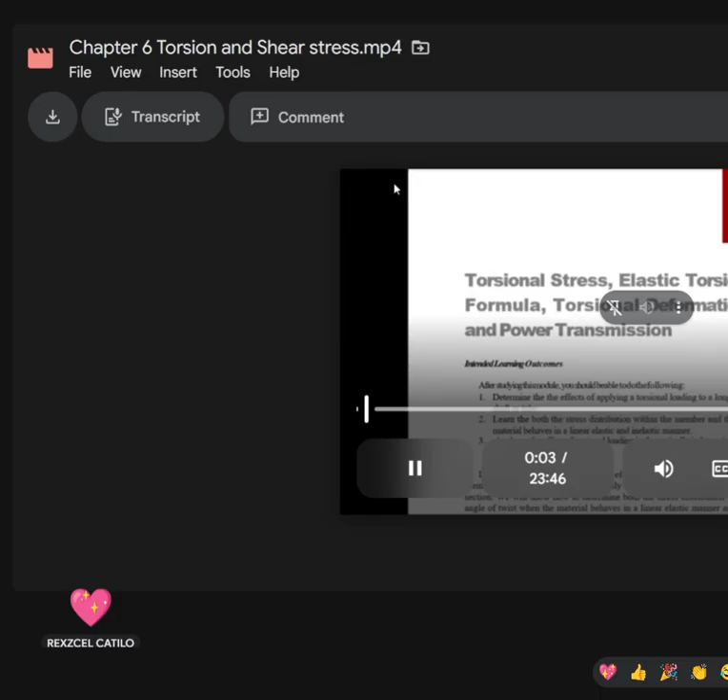So now we will proceed to our new chapter or module. We are now at module 6, titled Torsional Stress, Elastic Torsion Formula, Torsional Deformation, and Power Transmission. So from the word torsional stress, ano po ba yung stress na meron when our object or body is experiencing a torque? We also have the elastic torsion formula - what is the formula to determine the elastic torsion? Another one is torsion deformation, and also the power transmission. So for our module 6, we have 3 learning objectives.

So after this chapter, students should be able to do the following: first, determine the effects of applying a torsional loading to a long straight member such as a shaft or tube. Second, learn both the stress distribution within the member and the angle of twist when the material behaves in a linear elastic and inelastic manner. And last, third, analyze the effect of torsional loading in statically indeterminate shafts and tubes.

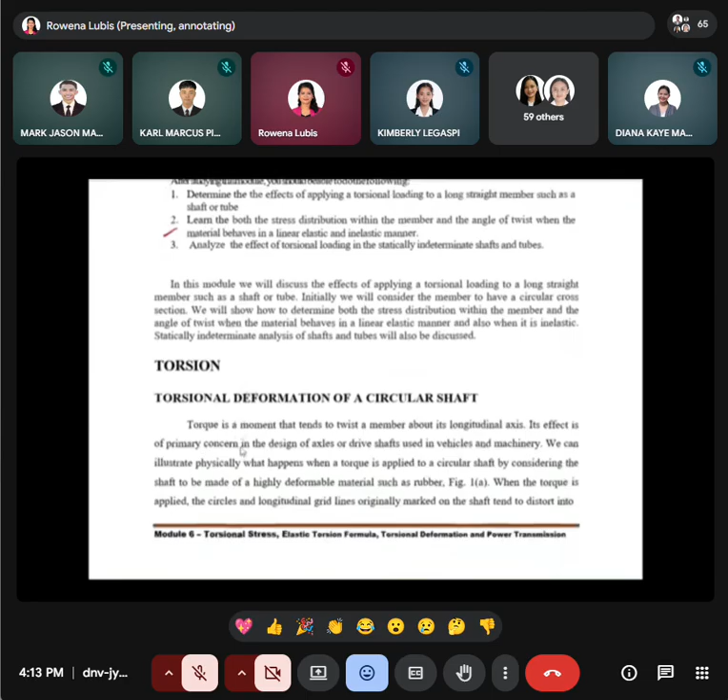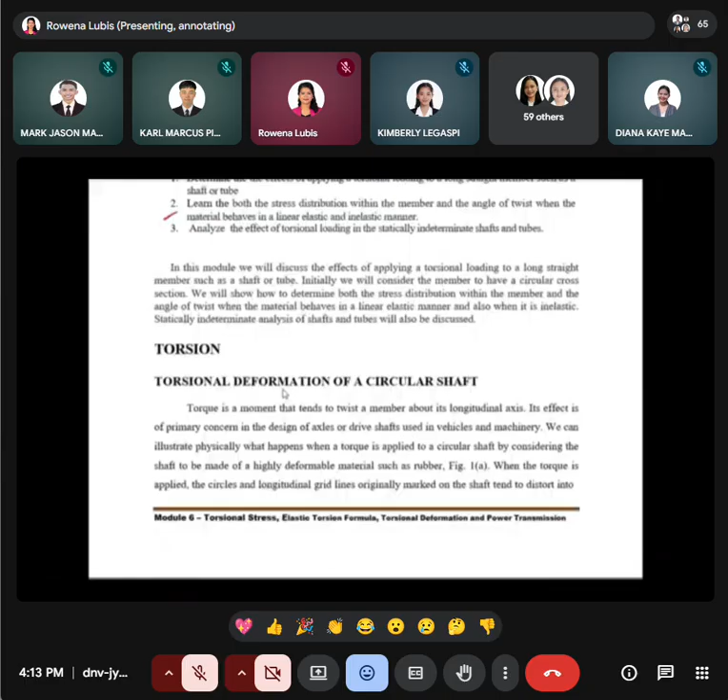Okay, so let's proceed with the torsion - torsional deformation of a circular shaft. We will discuss here the torsional stress and deformation which occur when a member, such as a shaft, is subjected to a torque or twisting. So look at the illustration - illustration A and illustration B at figure 1. You can see we have here part of the shaft. Once it is experiencing the torque, look at what happened to its longitudinal axis, what happened to the circular part, and what happened to its cross section.

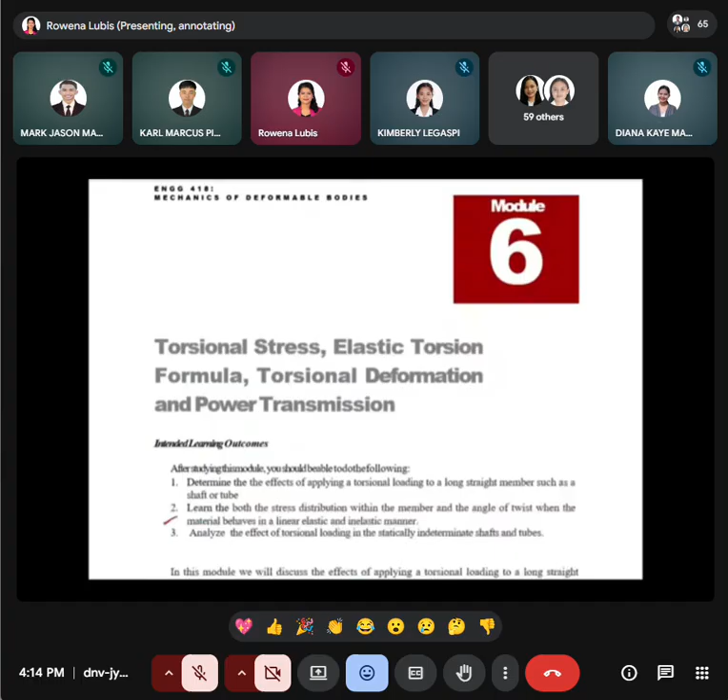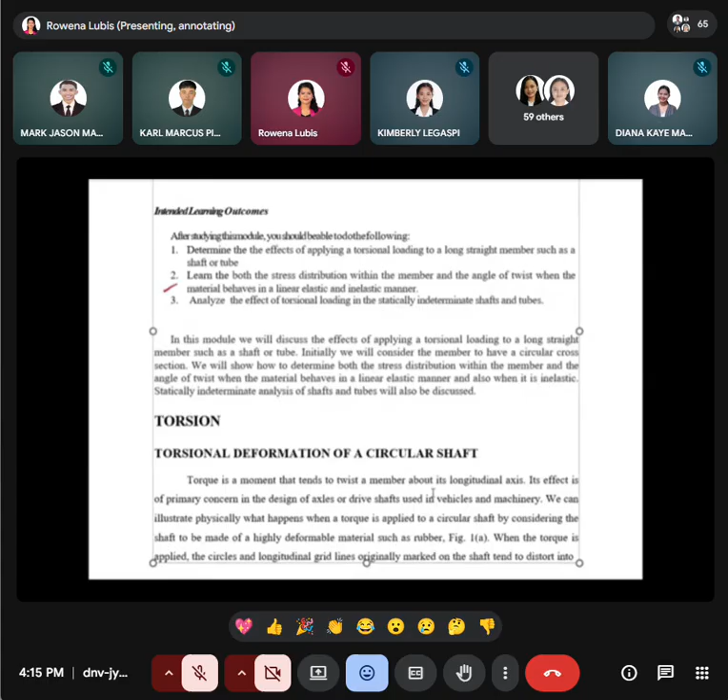So let's define first what is torsion or what is torque. As mentioned in our module or from previous study, we know that torque is a moment that causes a member to rotate about its longitudinal axis. This is very common in engineering applications, especially in drive shafts, turbines, and rotating machinery. We know that when a circular shaft is subjected to a torque, several things happen. As presented here at figure B, the shaft twists along its length.

Twisting causes the circles to remain circles in its circular cross section - the cross sections remain circular, but they rotate relative to each other. And the shear stress develops, and that shear stress developed varies along the radius of the shaft - meaning from the center, the shear stress develops going to the surface of the cross section of the shaft. So the key idea is the shear stress at the center is zero, and it increases linearly outward, reaching its maximum value at the outer surface.

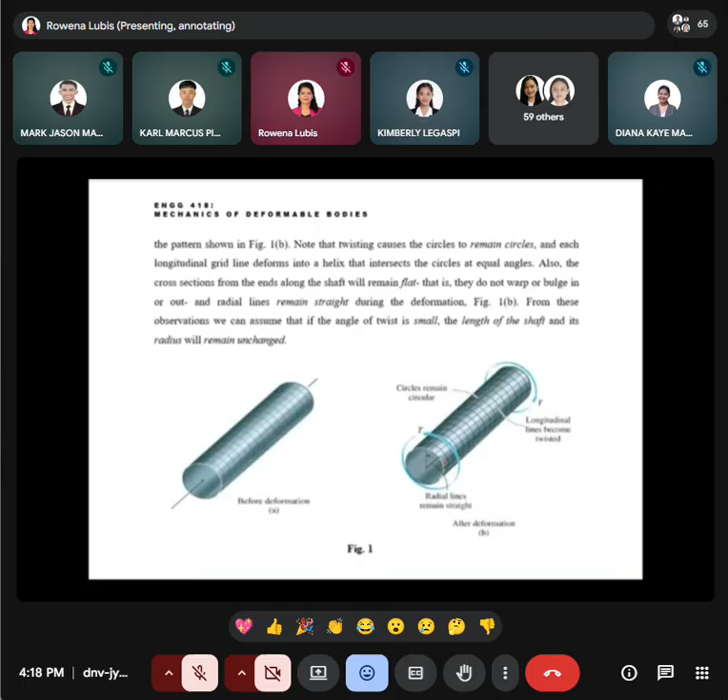The deformation is within acceptable limits, because those are very important for safe and efficient power transmission in design.

Let's proceed now with the torsion formula, because in this chapter, what you must do is to memorize or familiarize yourself with the formula. Pagkuha ng torsion, the shear stress, the polar moment of inertia, we do not have to derive, but I expect that every one of you understand the derivation of the formula. In solving torsion related problems, you just have to know or have memorized already the formula related to the torsion problem. So in this torsion formula...

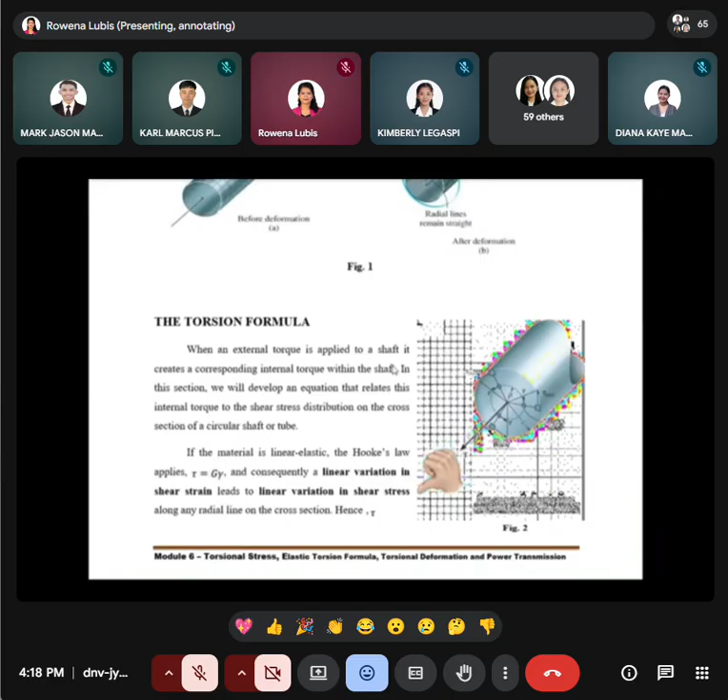Let's examine what happens to a circular shaft when torque is applied. As I mentioned, ito po yung ating original before the deformation. But after the application of torque, look at how the deformation happened in this circular shaft. It is being twisted in a certain angle. Its cross section or circular remains circular, but the longitudinal lines become twisted.

And how do we connect that to the torsional formula? So when an external torque is applied, it produces an internal resisting torque within the shaft. And what is that internal resistance? That is the internal torque. And because of that internal torque, it develops a shear stress. Shear stress distribution goes from the center to the surface of the cross section. The internal torque is related to the shear stress distribution over the cross section. As I mentioned, shear strain varies linearly from center to the outer surface.

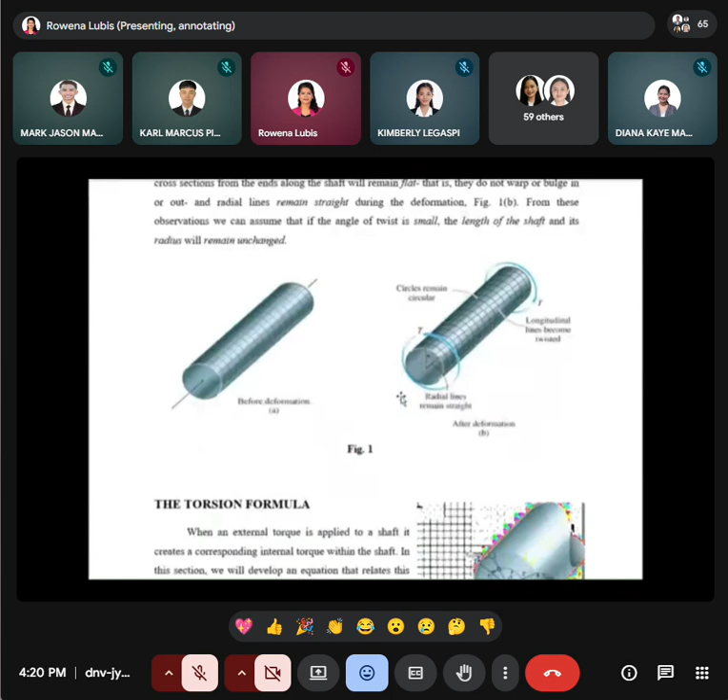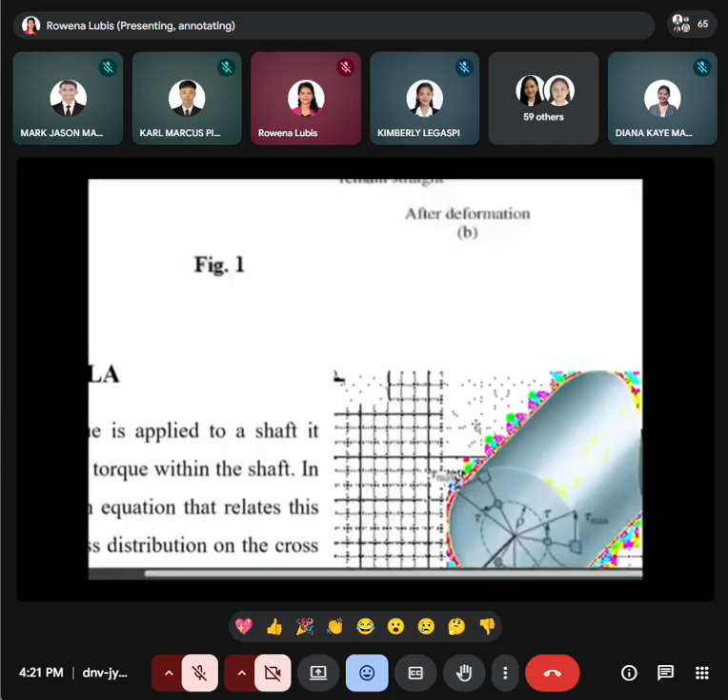Let's proceed to the next one. Actually this page presents the illustration. So as you can see, the relationship po, the cross-sectional area of the shaft, we can see the illustration of what we call this, somehow looks like raw, but it's actually not raw. It is a distance, or this is the location. So if we have the center, our rho at the center is equal to zero.

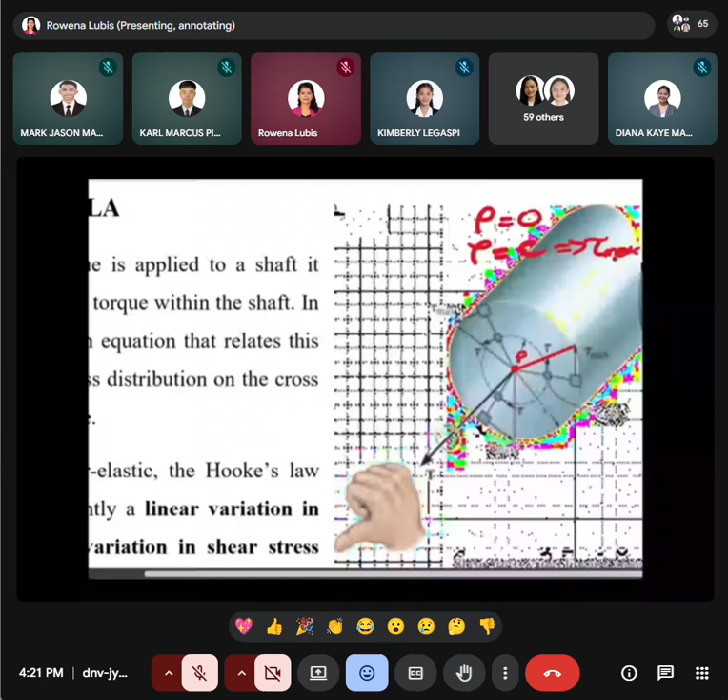Meaning shear stress is zero at the center. And at the outer surface, this distance, the surface of the shaft, our rho here, is the farthest point. This is the location of the maximum value of the shear, the tau max. This relationship is explained here on the next page of our module.

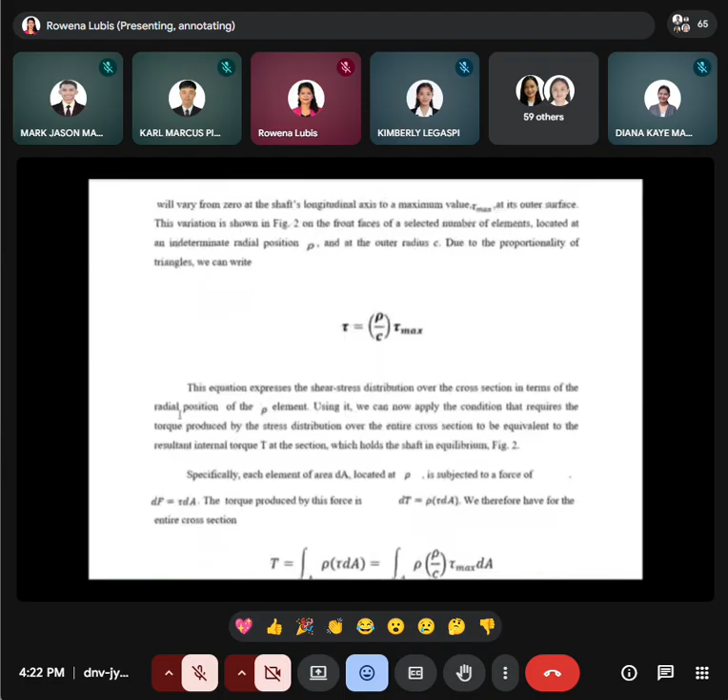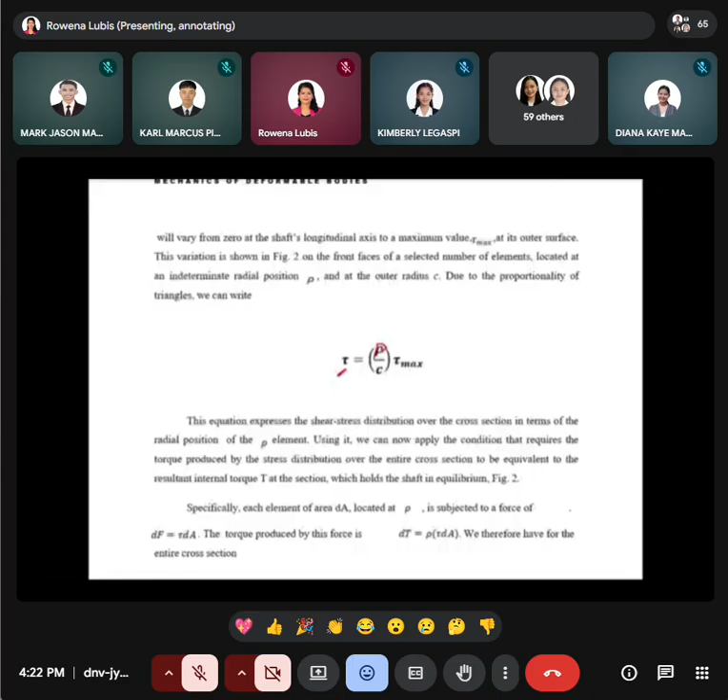The next page shows this relation, that our shear stress developed due to torque is equal to the certain point of the cross section of the shaft over the radius of the shaft, or the C, multiplied to the shear maximum or the maximum shear. So this equation tells us that the shear stress at any point depends on its radial position.

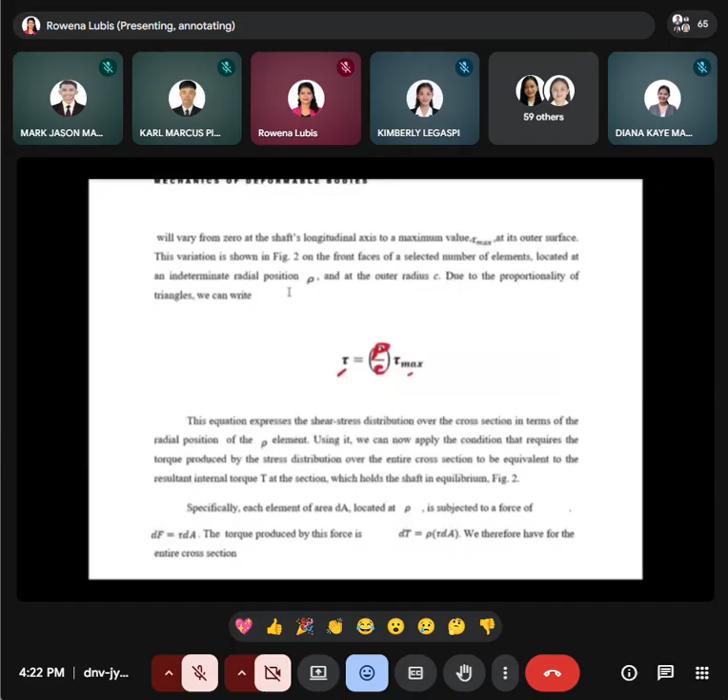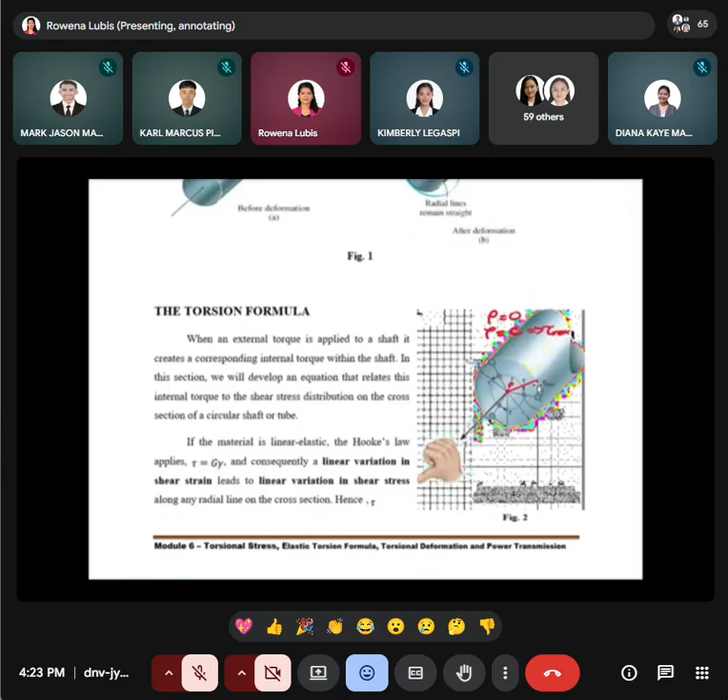And now to relate this to the applied torque, we consider again a small area element. Going back to the figure, we consider a small part of the element dA, a differential area, located at a distance, yung rho ng consideration. We have there yung ating dF is equal to tau dA. The small torque produced, of course, is dT.

Rho, or the distance at a point, multiplied to the tau dA. And to get the total torque, we just integrate: the integral of distance at any point rho multiplied to tau dA, in the limit of the area.

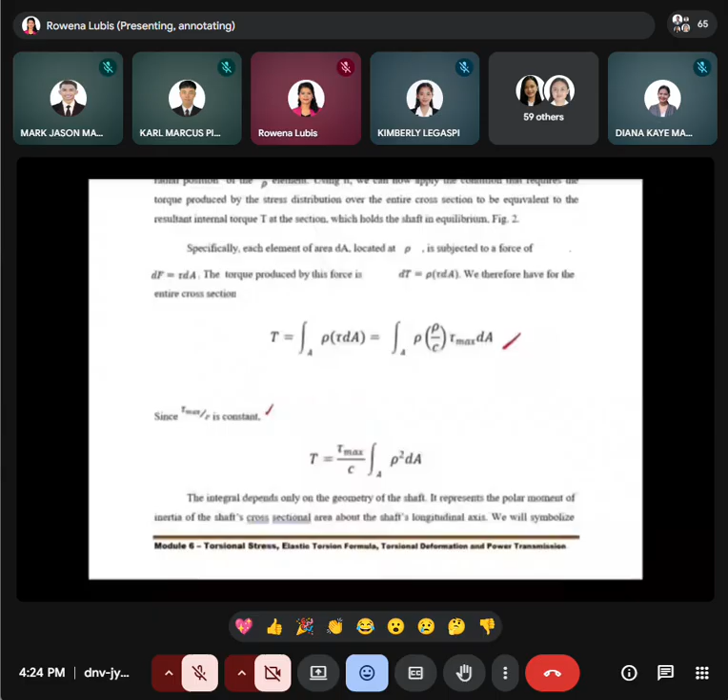Substituting the equation, it is well presented in our module. We will be having this equation. So our tau, sorry, the torque, tau, since our tau max over C is constant, we can simplify the equation. Labas natin siya sa integral equation: tau max over C, constant, times the integral of the distance squared, dA, limit of area. And with that term, we can simplify the term into this term.

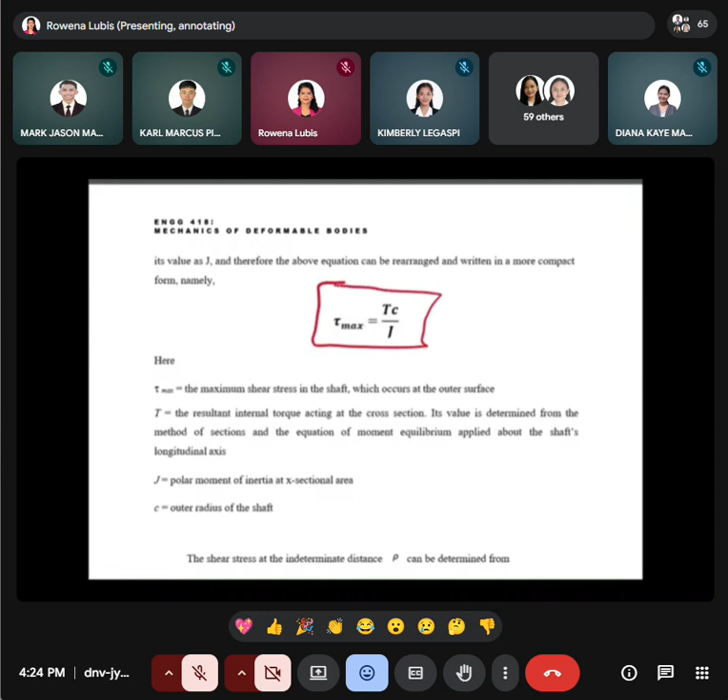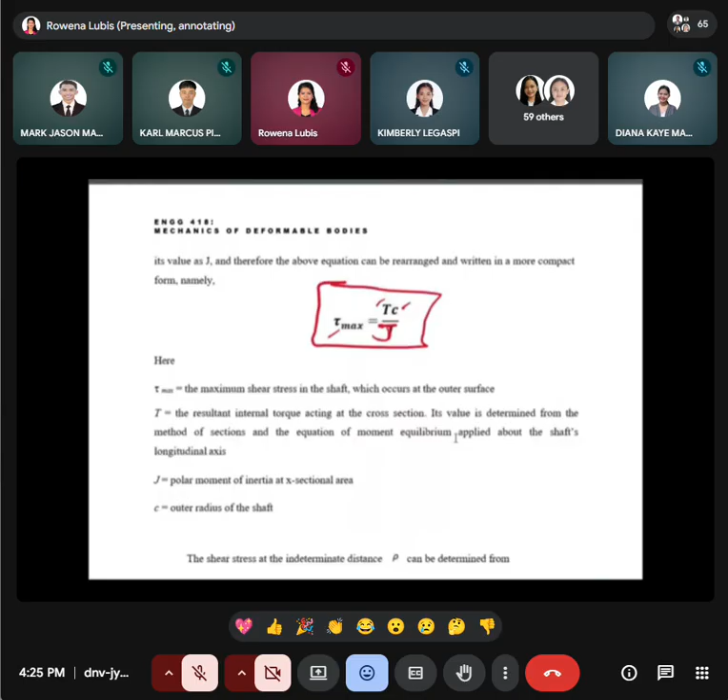That our maximum shear is equal to T multiplied to C over J. This is the maximum shear, the torque, the outer radius of the shaft, and the polar moment of inertia. So this is the formula for the maximum shear stress. Remember that the further a material point is from the center, the higher the shear stress it carries. This is why the outer surface is the most critical region in torsion design, because that is where the shear stress is maximum.

Now let's proceed with the next one. Still, after the formula for the maximum shear stress, let's go to the illustration.

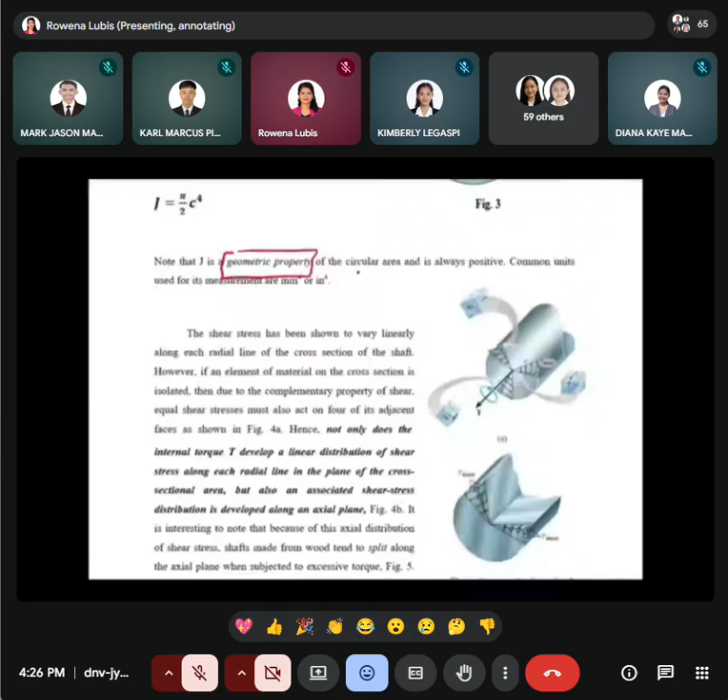J, or the polar moment of inertia, is a geometric property of the circular area. Remember that it is always positive. So our formula for the solid shape is pi over 2 times c raised to the 4. This is taken from this integral equation and simplification. What you have to do is just remember this formula.

As we mentioned, our maximum shear stress is equal to TC over J. So in a torsion-related problem, we get the value of the torque and then we find the value of the polar moment of inertia. This polar moment of inertia will be computed through this formula. Again, this is for the solid shape.

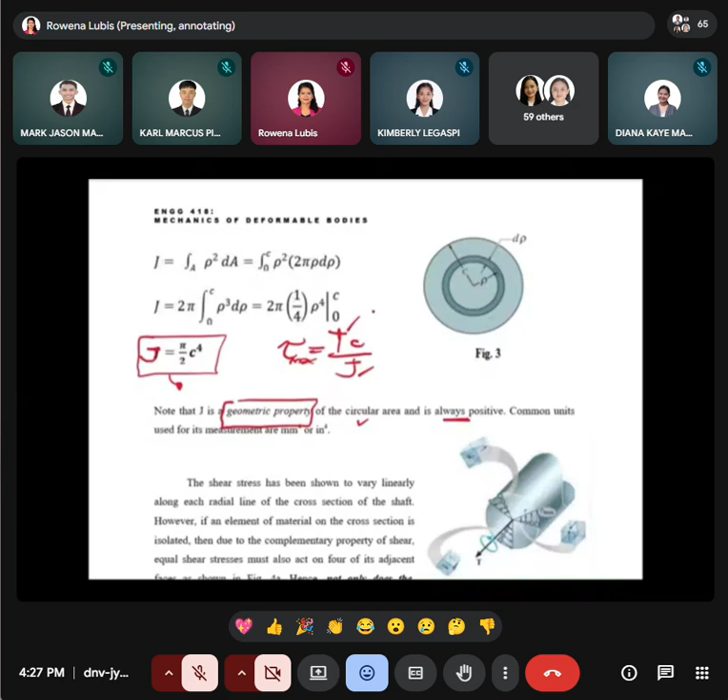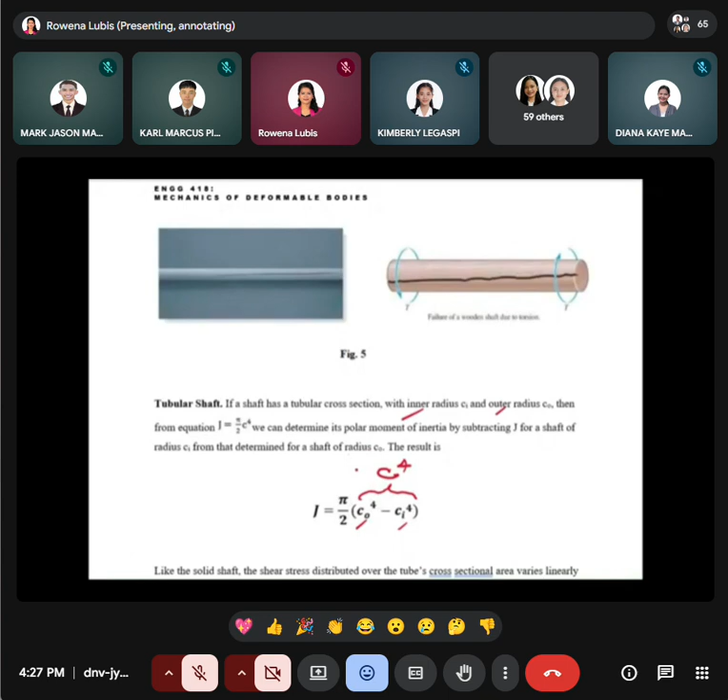Considering that we have a solid shape, if we have the hollow shape instead, given on the next page, when we're dealing with a tubular hollow shape, meaning we have the outer and the inner radius, the formula for a solid shape is just C raised to the 4. But in case of a hollow shape, it's outside radius raised to the 4 minus inside radius raised to the 4. So remember the formula, because we will need it to find the value of the maximum shear stress. We need the value of the polar moment of inertia.

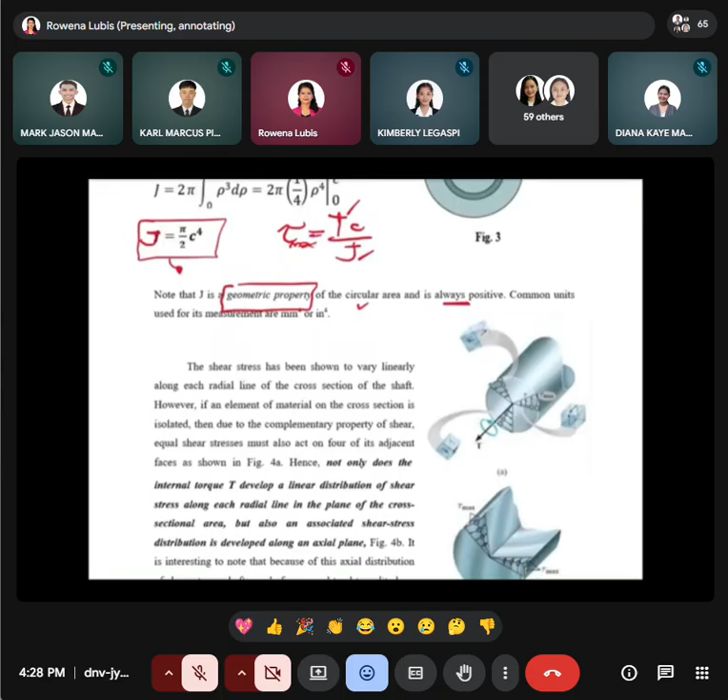And here for the absolute maximum torsional stress, as I mentioned, it is at the surface or outer radius of our shaft. To determine the maximum stress in a shaft, we use the relation of torque, the C or the radius, divided by the J. So that's what I was saying.

Just remember that hollow shafts are widely used in the engineering field because they provide high strength with less material. Understanding where the maximum torsional stress occurs ensures safe and efficient design. So that's all you need to remember.

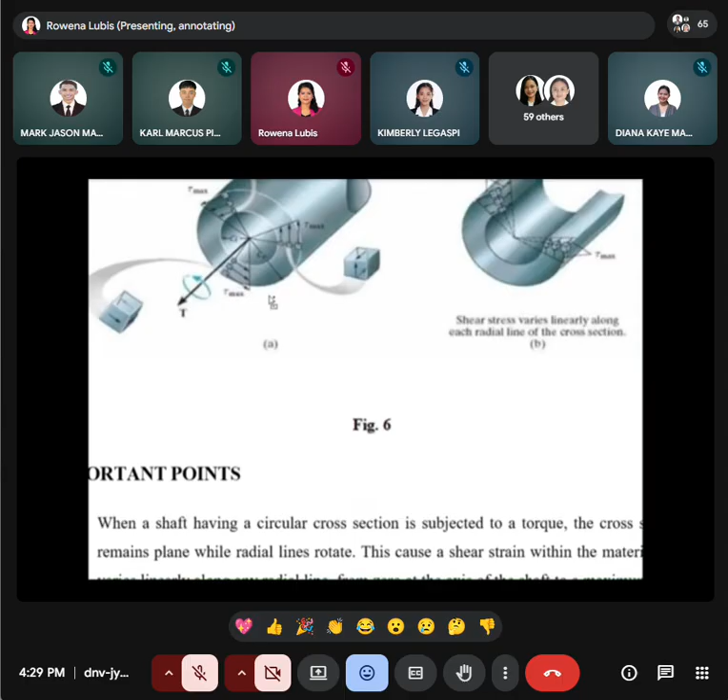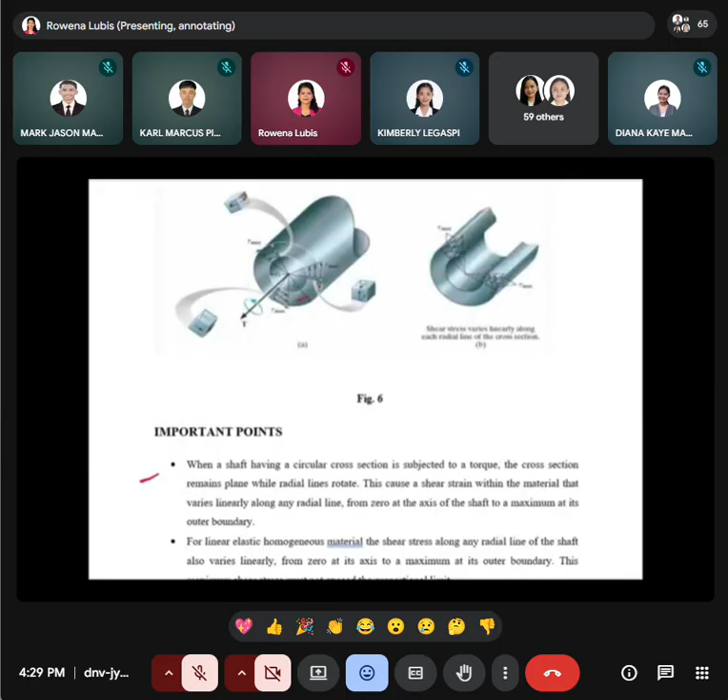Let's proceed with the important points. This illustrates how it happens. For the important points, let's take it one by one. First, when a shaft is subjected to torque, the cross-sectional area or the cross-section remains the same plane, and it rotates as a rigid body. This means there is no warping and the shape stays circular.

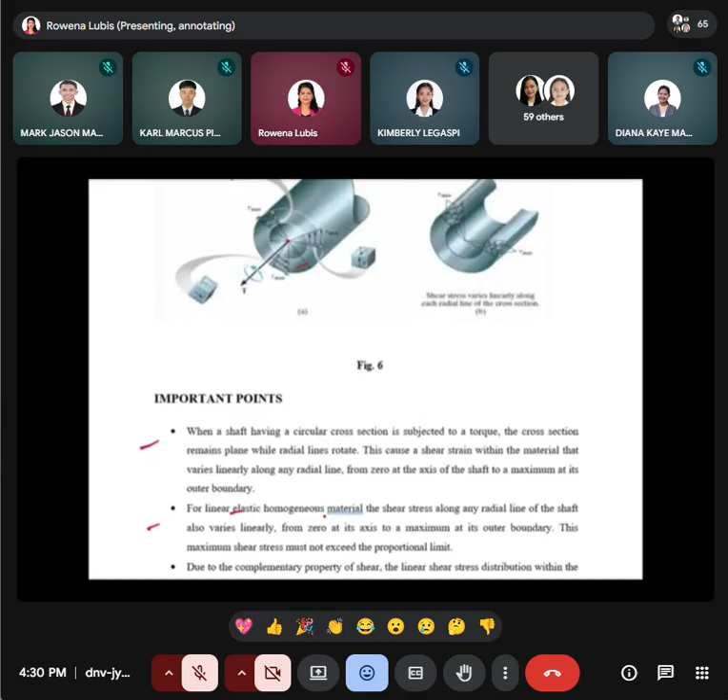Second, the shear stress varies linearly along the radius. As I mentioned, from zero at the center, it goes to the maximum at the outer surface. This linear variation is a direct result of the material behaving in a linear elastic manner, following Hooke's law.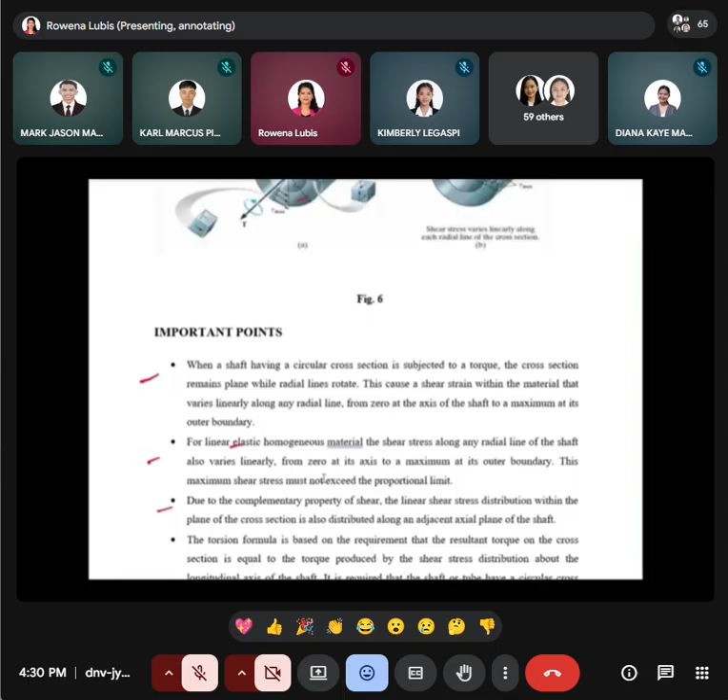Another important concept is the complementary nature of shear stress. Because of this, shear stress is not only present on the cross-sectional plane, it is also present along an axial plane of the shaft. This explains why torsional failure may occur along the length of the shaft, not just merely in its cross section, especially in materials that are weaker in that direction.

Finally, for the important points, the torsion formula is based on equilibrium. We still use the equilibrium equation. From the word torsion, what is torsion? When we deal with the equations of equilibrium, it's just a moment, which has a unit of force multiplied by distance, could be Newton-meter, pound-inch, or pound-foot. So it's just the same unit as moment. The internal resisting torque must be equal to the applied torque when we apply the equations of equilibrium.

This comes from the distribution of shear stress over the cross section. But remember, the formulas we are dealing with in torsion are just for a circular cross section. They are not applicable to rectangular cross sections; these formulas are applied only to circular cross sections.

Another assumption to consider: the material is homogeneous and behaves linearly elastic. These are important points to remember. In torsion, both geometry and material behavior control how stress is distributed. So that's what you should remember.

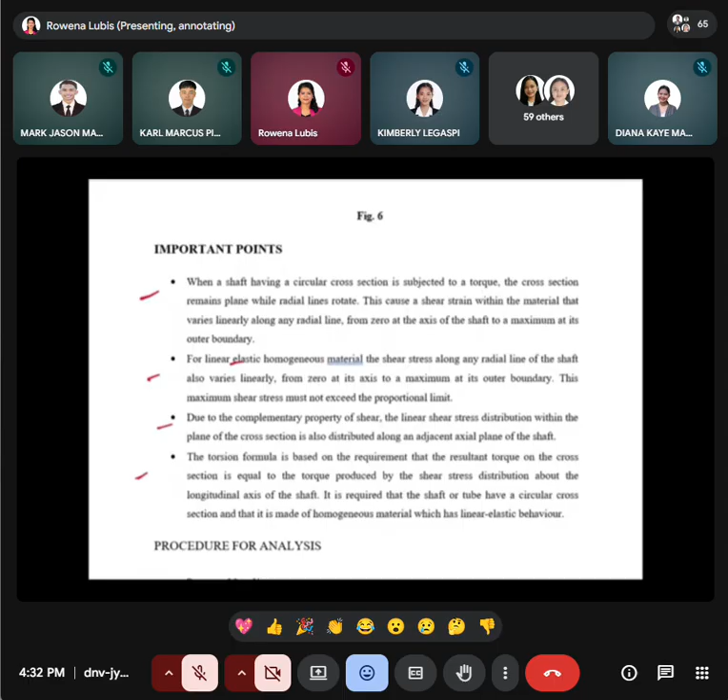The procedure for analysis: first, for the internal loading, this is how we get the value of torque. First, we should make a free body diagram. Determine the internal torque by sectioning the shaft perpendicular to its axis at the point where shear stress is to be determined. It's up to you how you find it, but I hope you already know how to establish your free body diagram.

Same as with moment, you will make a torque equation, satisfying the conditions of equilibrium. After you find the value of torque...

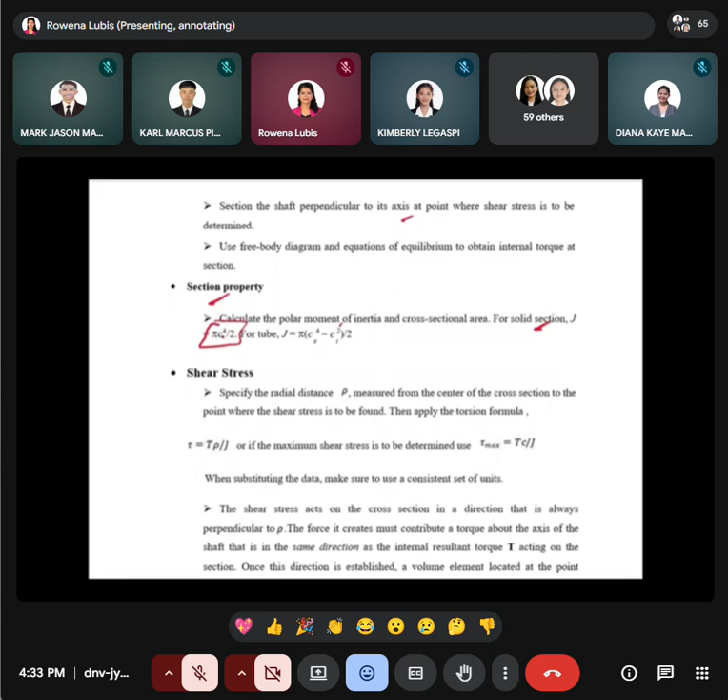Calculate from your section property the value of the polar moment of inertia and the cross-sectional area. For a solid section, we have the formula pi over 2 times c raised to the 4th, where c is the radius. For a tube or hollow shaft, we have pi over 2 times the outside radius raised to the 4th minus the inside radius raised to the 4th.

Once we know the value of J and the value of torque, we can proceed to determine the value of shear stress. What you have to do is determine where you want to evaluate the stress, by measuring rho, the radial distance from the center. Applying the formula, shear stress equals T multiplied by rho, the radial distance from the center, over the polar moment of inertia.

If you are solving for the maximum shear stress, tau max, you just use the formula equal to torque times C, the outside radius, over the polar moment of inertia. This is the formula.

For the important note, remember to always use a consistent set of units. Shear stress acts perpendicular to the radial distance, so the direction of shear must produce the same sense of rotation as the applied torque.

Everyone, now let's proceed with power transmission, still in shafts. Let's discuss how the formula is used for power transmissions. In engineering systems, shafts and tubes are often or commonly used to transmit power from one component to another, such as from a turbine to a generator or from an engine to wheels.

In the concept of power rotation, we already know the definition of power: power is defined as the work performed per unit of time. We knew from our previous courses that power is just the rate of doing work. For a rotating shaft, work is done when a torque causes rotation. If the shaft rotates by a small angle theta...

...the work done is dw equals T d theta. And what happens to power? Power becomes T d theta over dt.

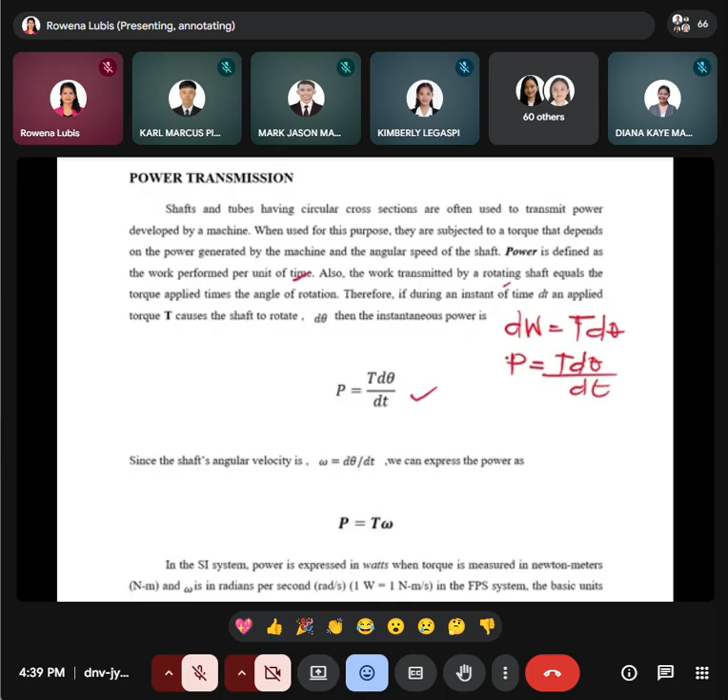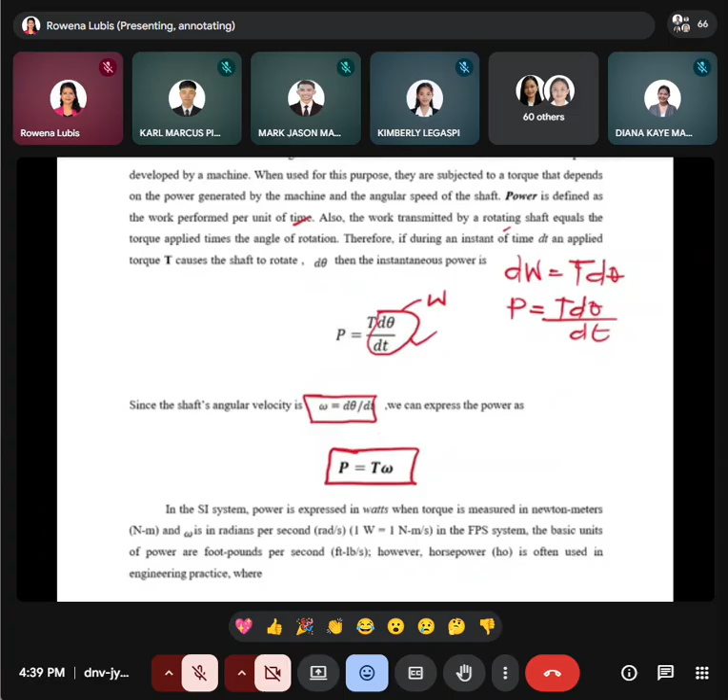And the power torque relationship, remember, we have the angular velocity of the shaft represented by omega, d theta over dt. So this is our angular velocity. Our power now, substitute the value here with the angular velocity. Therefore, our power is equal to torque multiplied to the angular velocity. That is the simplified equation.

So remember the formula for the power. Here it's just showing the units of power. In SI unit, we have watts. For the unit of torque, Newton meter. For the unit of angular velocity, we have radian per second. And remember that 1 watt is equal to 1 Newton meter per second.

And in FPS system or the foot pound system or foot pound second system, abbreviation lang po. So the basic units of power are foot pound per second. But of course, mas ginagamit din natin ang HP or the horsepower, is often used in engineering practice. And the conversion, 1 horsepower is equal to 550 foot pound per second.

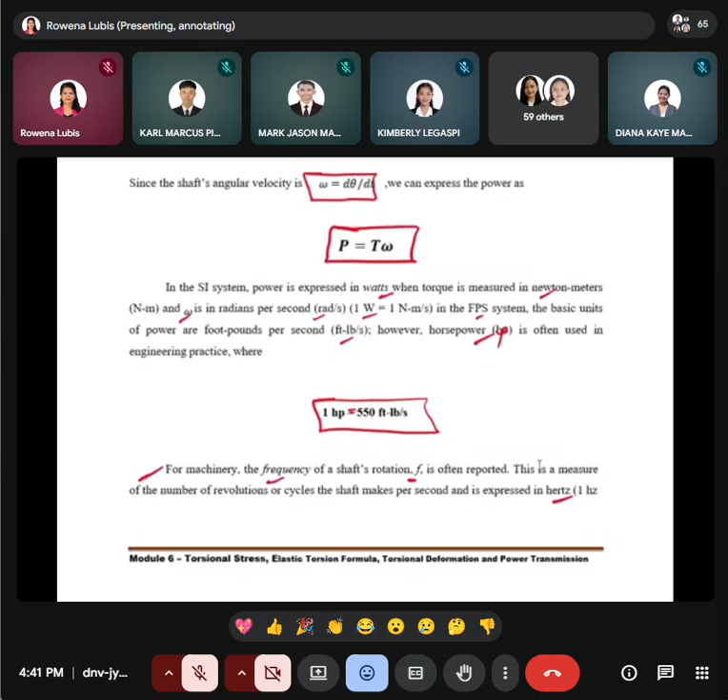And another thing that we should be reminded is the frequency of rotation. So in practice, we also use frequency or F. So it represents the number of rotations per second. So it is being measured or expressed in hertz. So the relation to angular velocity. What is the relationship? This is the relationship of the frequency and angular velocity.

We have the formula angular velocity is equal to 2 pi multiplied to f or frequency. Since one cycle is equal to 2 pi rad, then angular velocity is equal to 2 pi f. Therefore, if this is angular velocity, di po ba kanina power is equal to torque multiplied to the angular velocity, and this is now 2 pi f. So substitute to the formula, it will give us another formula for power in terms of torque and frequency. P is equal to 2 pi f T. So you just have to remember the formula.

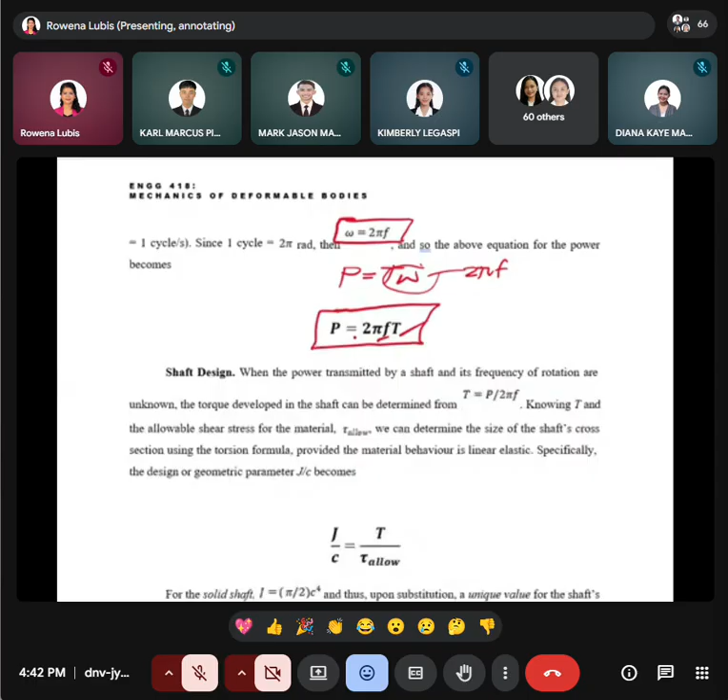So this relationship shows that power can be increased by torque and F, by the rotational speed. This is why high-speed turbines can generate a large amount of power even with moderate torque. So just remember, in a rotating system, torque causes motion, but power tells us how fast energy is being transferred, making it a key parameter in machine performance.

And in shaft design, when the power transmitted by the shaft and its frequency of rotation are unknown, the torque developed in the shaft can be determined. So coming from this equation, we can find the value of the torque. The torque is equal to P divided by 2 pi F.

So torque natin, mayroon pa siyang relationship sa ating polar geometry. So in shaft design, okay po for the concept. In design, our goal is to ensure that the shaft can safely carry the torque without exceeding allowable stress. So using the formula a while ago, we can have the design or geometric parameter, this J over C becomes this equation.

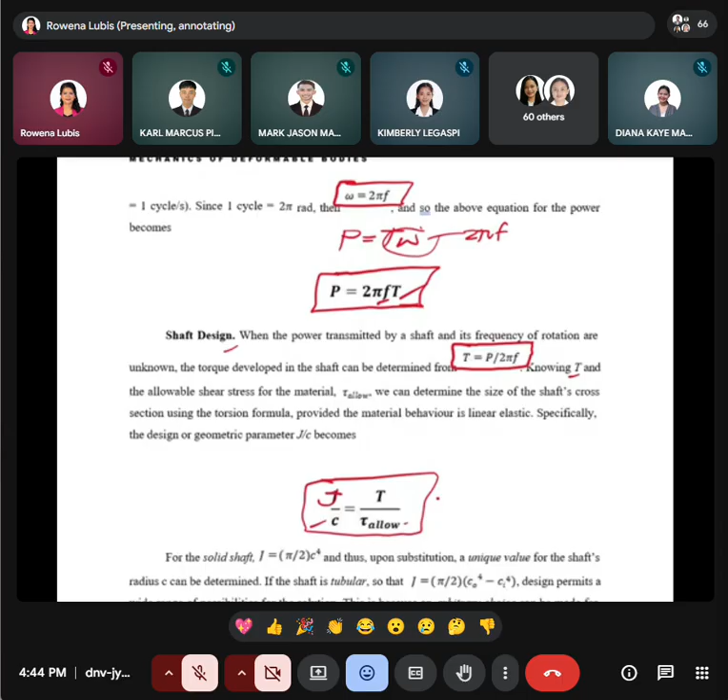Where our shear allowable stress, this is the geometric design parameter. So this T over allowable stress is our relationship. Makikita natin po dyan ang ating relationship nila. And for designing the solid shaft, lagi na pong kakabit natin ang formula ng polar J ng solid shaft. Formula pagkuha ng J ng hollow or tubular shaft. Okay, so lagi pong tatandaan because that will always be part of the design for the shaft.

Okay, so remember that the design of hollow shaft, considering yung kanyang outside radius and inside radius. So hollow shaft are often preferred, siya yung laging preferred gamitin. Why? Because they provide the same strength with less material, making them lighter and more efficient.

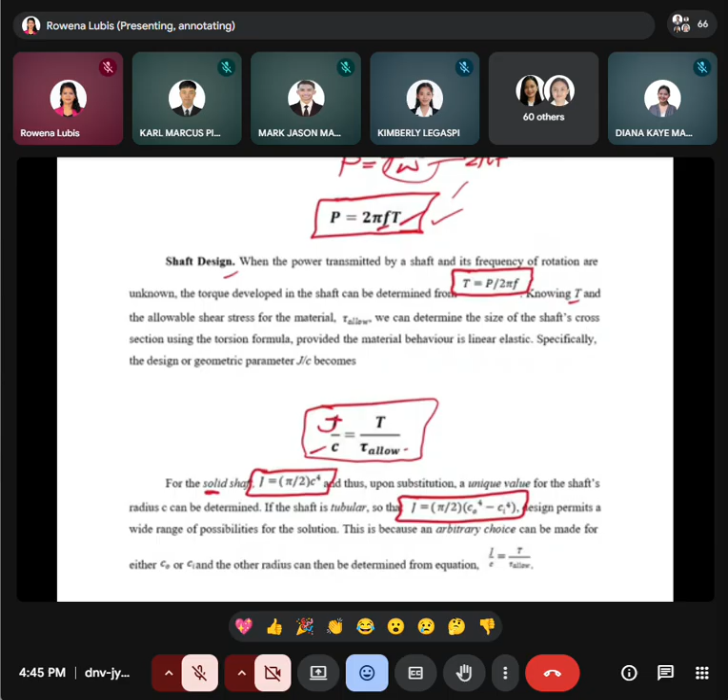Okay, so to summarize with this power and torque and this relationship. So remember that in shaft design, power determines the torque. So from the formula, makikita naman po natin. And torque determines the size of the shaft, yung mga sizes po niya, linking performance directly to geometry and material strength. Now let's proceed with the next page natin.

So this is an illustration. This is the angle of twist. So we already mentioned a while ago what is the angle of twist. That is the angle produced in the cross-sectional area once our tube or shaft is being twisted, napihit. So, what is an angle of twist?

When a shaft is subjected to torque, it definitely develops stress. That's why we compute the shear stress. So it does not only develop stress, but it also rotates along its length, napipihit hanggang doon sa kahabaan ng kanyang length. So this rotation between one end of the shaft and the other is called the angle of twist.

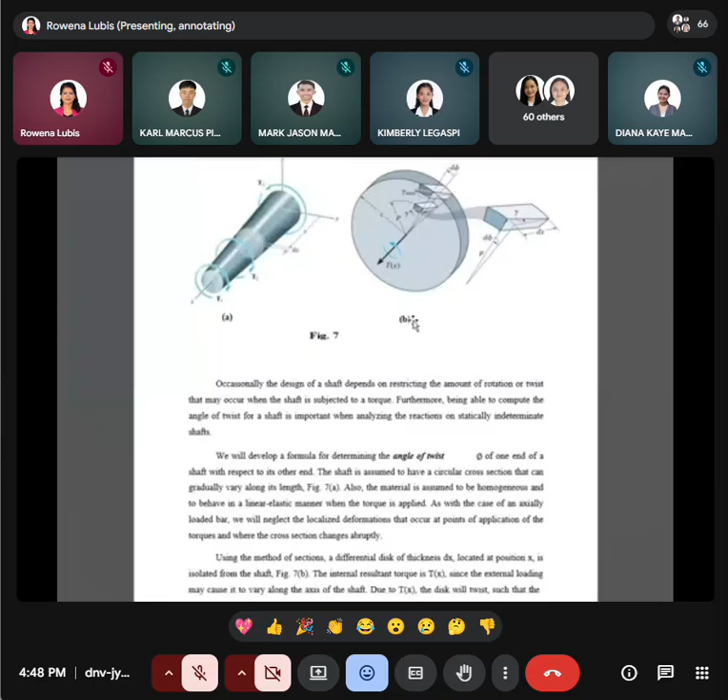This is also especially important in analyzing statically indeterminate shafts. When we say indeterminate from our previous discussion, the value cannot simply be obtained through the equations of equilibrium. So going back to the angle of twist,

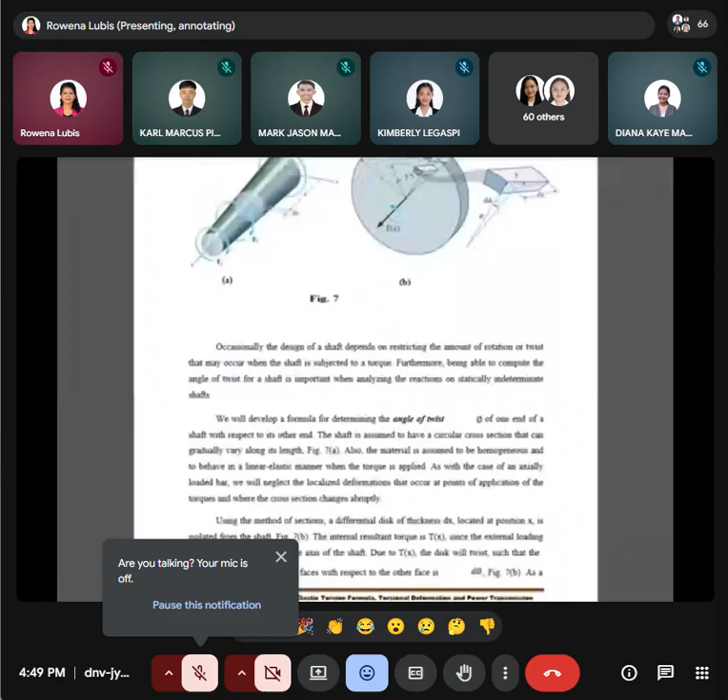the assumptions for the analysis we are going to do: we consider that the shaft has a circular section, the material is homogeneous, and it behaves in a linear-elastic manner. Meaning we also assume that the deformations are small and gradual. So that is our analysis or assumptions being used.

So in torsion, deformation is gradual and each small twist adds up, resulting in the total angle of twist of the shaft.

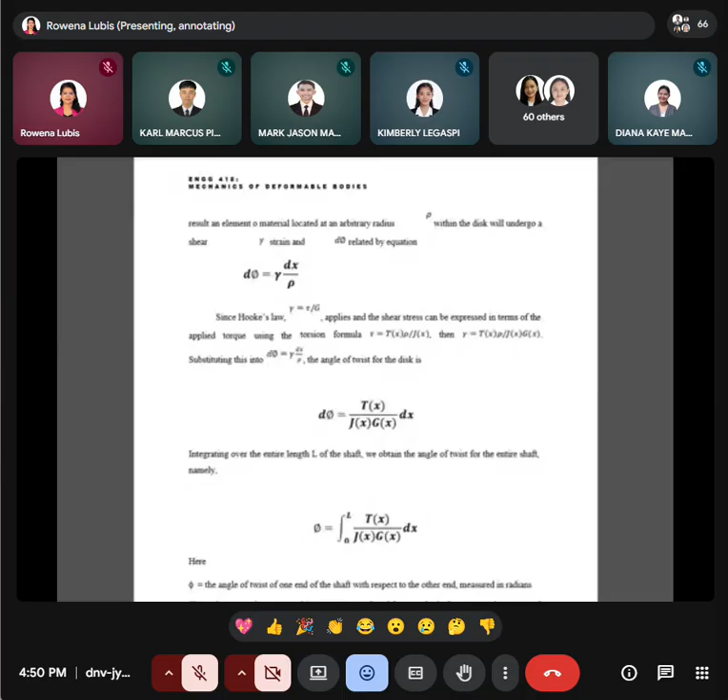So another one, this is now the derivation of the angle of twist. Based on the illustration from the previous page, we can notice the relationship of the shear strain to twist, our gamma.

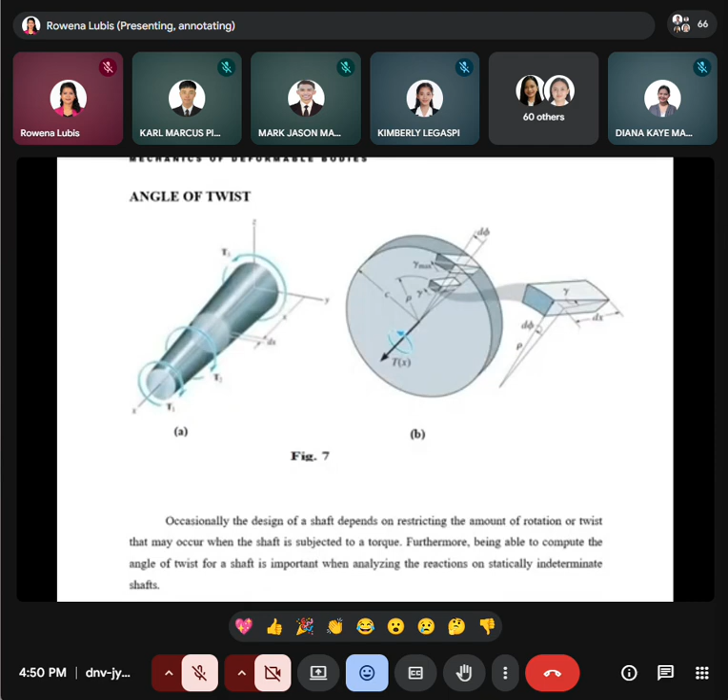So we have our D-phi equal to our gamma, dx over our rho, or this distance, up to that point.

So apply the material behavior, Hooke's law, where gamma equals tau over G. And from the torsion formula, we have tau equals T of x times the radial distance over J of x. With this relationship, our gamma now equals T of x times our radial distance over J of x, G of x.

And then after that, we substitute into the differential equation. We substitute into this equation. So we have D-phi equals T of x over J of x, G of x, times dx.

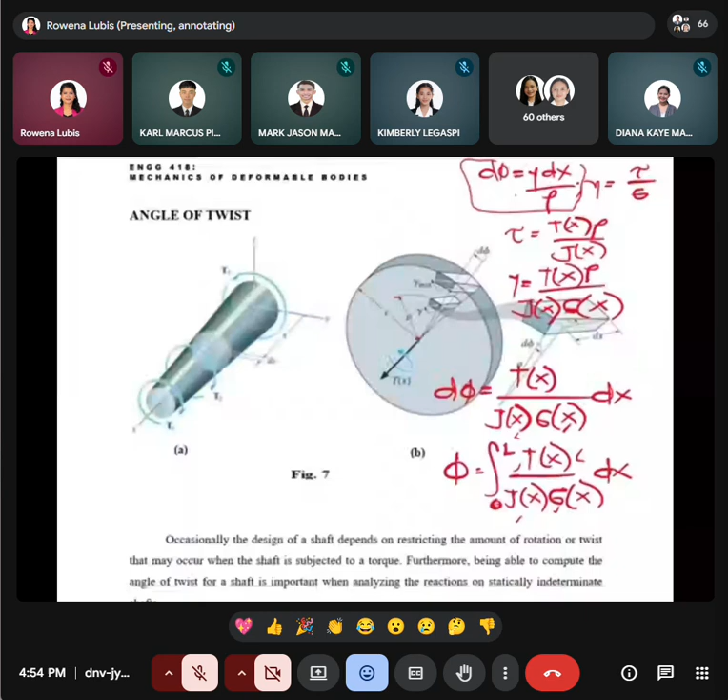And given this equation of the angle of twist, if T, J, and G are constant, the equation can be simplified to: angle of twist equals T multiplied by the length of the shaft, over GJ.

So this is the formula for the angle of twist, considering the case that our torque, our J, the polar moment of inertia, and our G, the modulus, are constant. So we can just use this formula for the angle of twist.

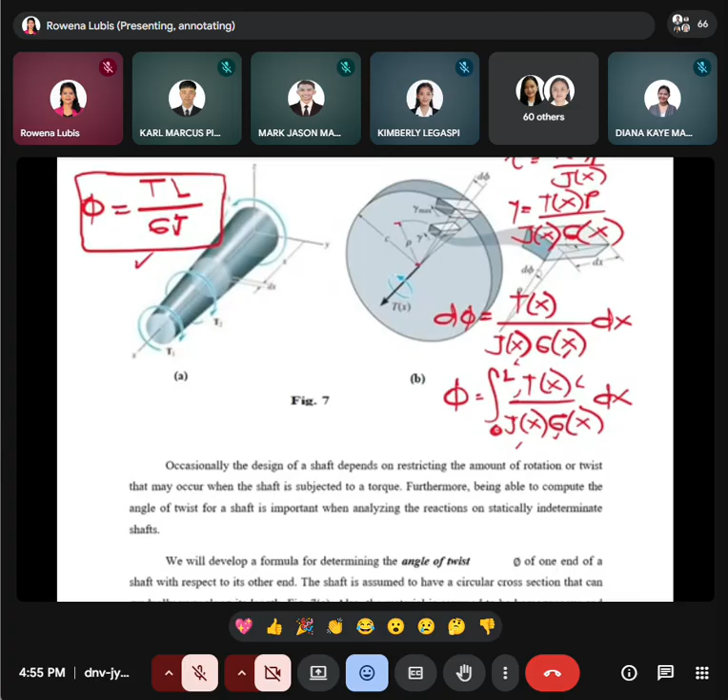So you don't need to derive it again, you just have to remember the formula—formula for torque, for shear stress, for angle of twist. Then apply it, know the value, and substitute the value into the given or derived formula. So this is the formula for the angle of twist.

Okay, so let's move on to another one, for similarity to axial deformation.

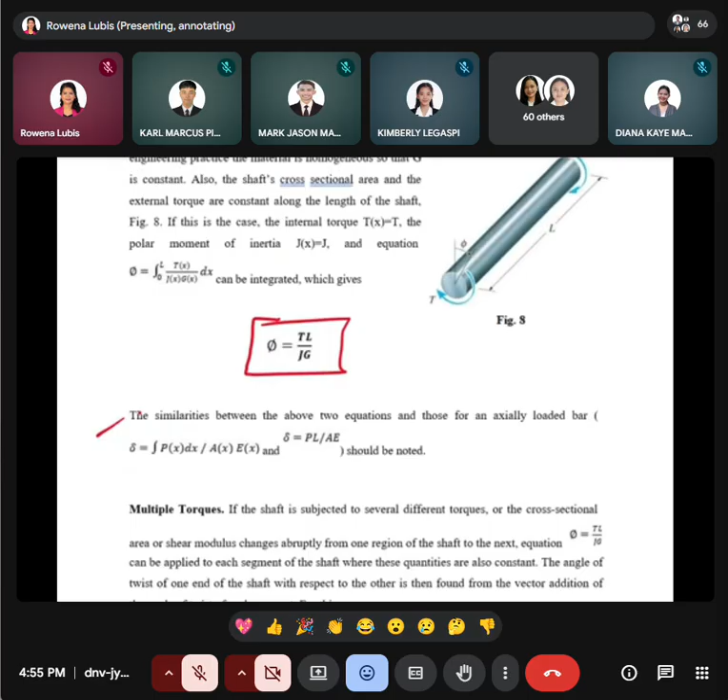Notice the similarity with axial deformation in this illustration. So we have the equation of our deformation, delta equals PL over AE. The load relates to the deformation, and then the geometry plus the material is the resistance. So it also relates to this equation or formula.

And then we still have multiple torques, multiple or many torque segments. So if the shaft is subjected to several different torques, or the cross-sectional area or shear modulus changes abruptly from one region of the shaft to the next, our equation is this one.

So it can be applied to each segment of the shaft where these quantities are also constant. So to know the total angle of twist, we just take the summation of all the segments. That is the total summation or total angle of twist, because each segment contributes its own twist. So the total twist is the sum of all segment twists. I hope you get it. You just have to get the summation of all the twists in the segments.

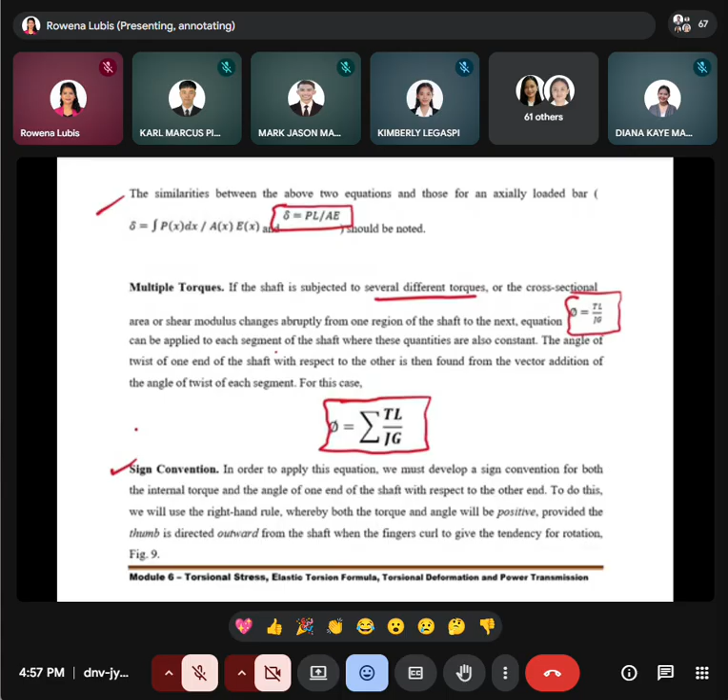Okay, let's move on to the sign convention. You could assume, but basically it is recommended to use this sign convention because it is very important to correctly apply the formula. So let's proceed with the illustration.

So here we have the right hand rule. If the torque causes rotation in the direction of the curled fingers, with the thumb pointing outward, that is positive torque and twist. Just look at the direction. The hand is represented here, curled in the direction of rotation of the torque, same as the moment. If the fingers curl into the direction of counterclockwise, that is positive. If it's the other way, the assumption of the right hand rule is clockwise direction. So you must follow this positive sign convention for T and angle of twist.

Sometimes it's shown differently. In real systems like turbines and drive shafts, torque may vary along the length. So breaking the shaft into segments ensures accurate prediction of total twist, and the angle of twist is not just one value. It is the sum of how each segment of the shaft corresponds to torque.

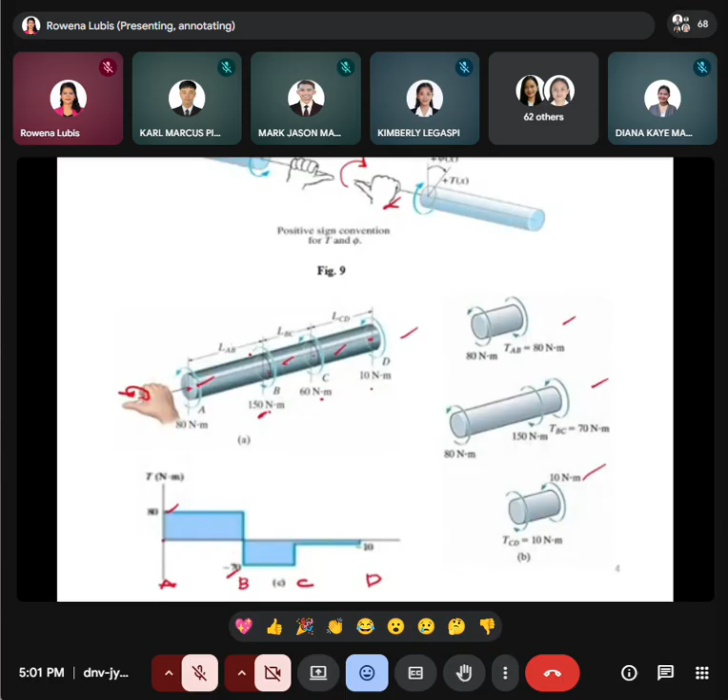Going to point C, we have the torque 60 Newton meters in the direction of counterclockwise, meaning that is positive. So from point B where we have negative 70, going to point C having positive 60.

So the total torque at point C will be negative 70 plus 60, that is negative 10 at C. It will move to negative 10. And at the end of the shaft at point D, given the positive 10 Newton meter, coming from point C having negative 10, going clockwise torque which is positive 10, counterclockwise torque which is positive 10 Newton meter. So negative 10 plus 10, that is 0. You will go to 0 at point D. So that is how we do the torque analysis and how we use the sign convention when it is positive and when it is negative. Do not forget, it's just the same as the moment.

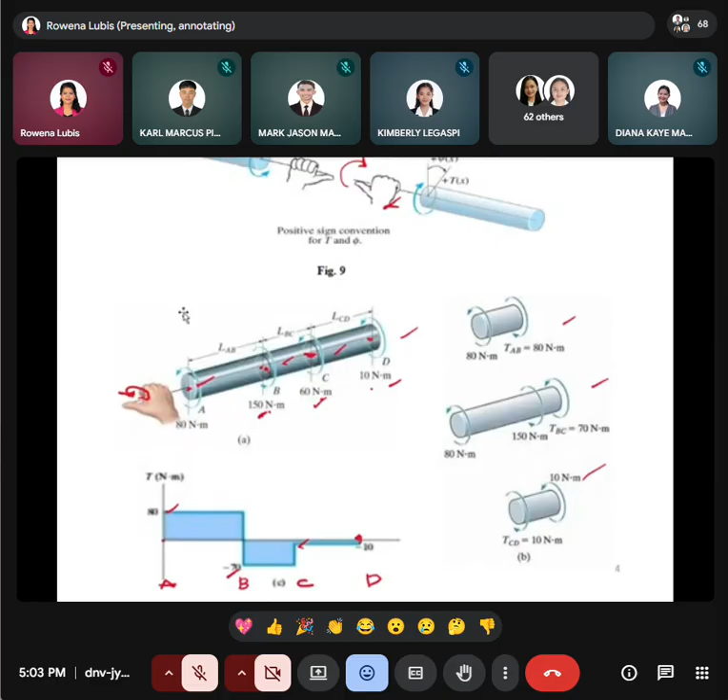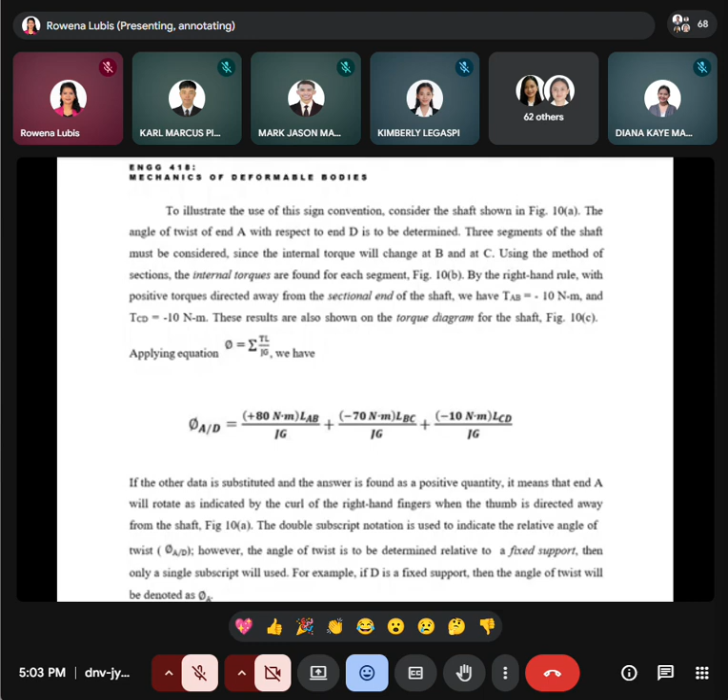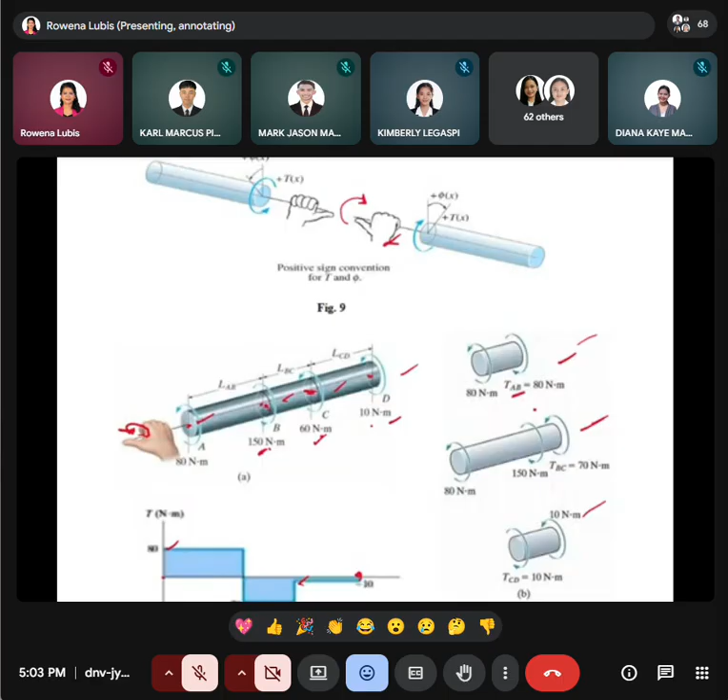And then we have here the angle of twist for multiple segments with the use of sign convention as we did it a while ago. So let's apply the concept of angle of twist to a shaft with multiple torque segments. As an illustration, divide the shaft and cut it into three segments. We have segment AB, segment BC, and segment CD. So each segment has its own internal torque value. Each segment has its internal torque value.

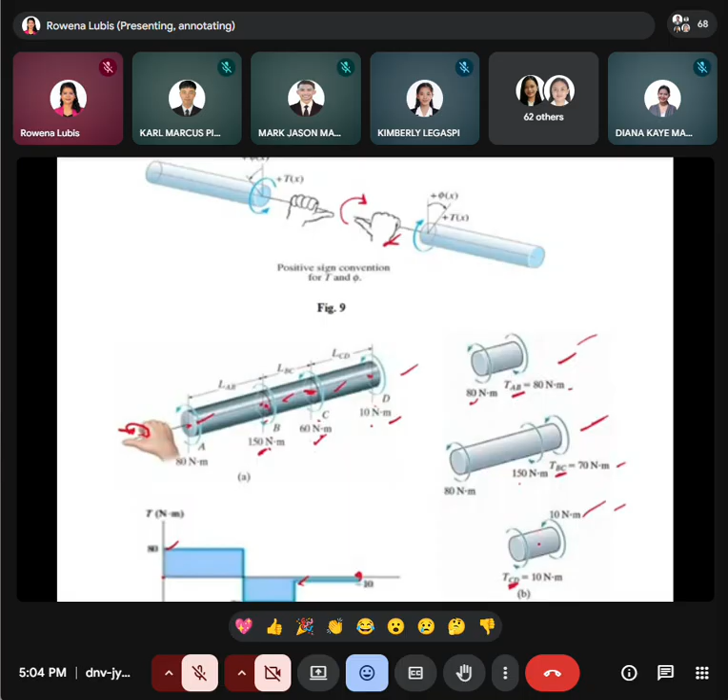So A to B, that is 80 Newton meter. B to C, that is 70 Newton meter. And C to D, that is 10 Newton meter. So we already determined the torque at AB, torque at BC, and torque at CD. So the positive and the negative. The positive means the assumption is the sign is the rotation of the torque is same with our assumption, and negative indicates the opposite direction of our sign convention.

Now applying the angle of twist equation, the angle of twist is the summation of TL over JG. So substitute all the torque values of our angle of twist from A to D. This will give us this equation. So the total angle of twist between points A and D is the sum of twists in each segment. So that's it, we just add them, and that will give us the angle of twist. It is just the algebraic sum of twist from each segment, so both magnitude and direction must be considered.

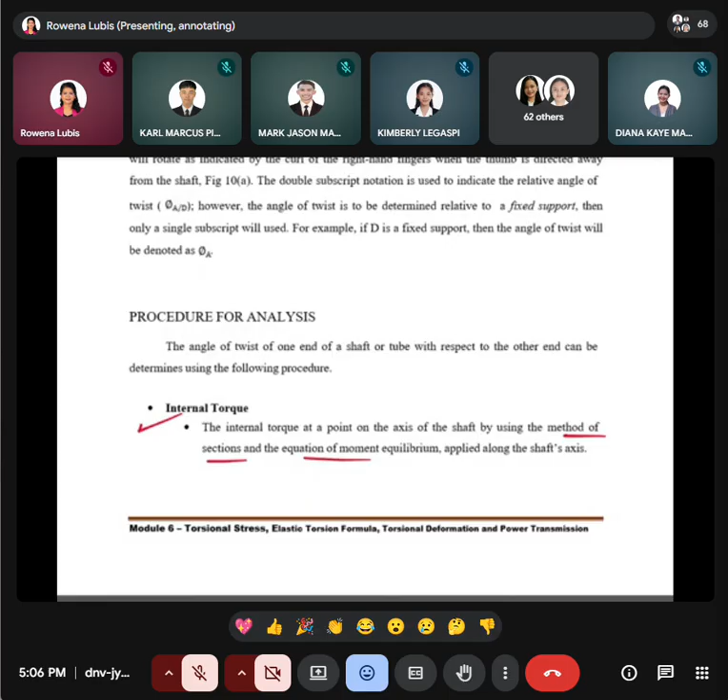Listen. So, procedure for analysis: the angle of twist of one end of a shaft or tube with respect to the other end can be determined using the following procedure. Same procedure: find the value of the internal torque. This can be done by the method of sections and using equations of moment equilibrium applied along the shaft axis. Next, if the torque varies along the shaft length, a section should be made at the arbitrary position x along the shaft and the internal torque represented as a function of x. And if several constant external torques act on the shaft between its ends, the internal torque in each segment of the shaft between any two external torques must be determined.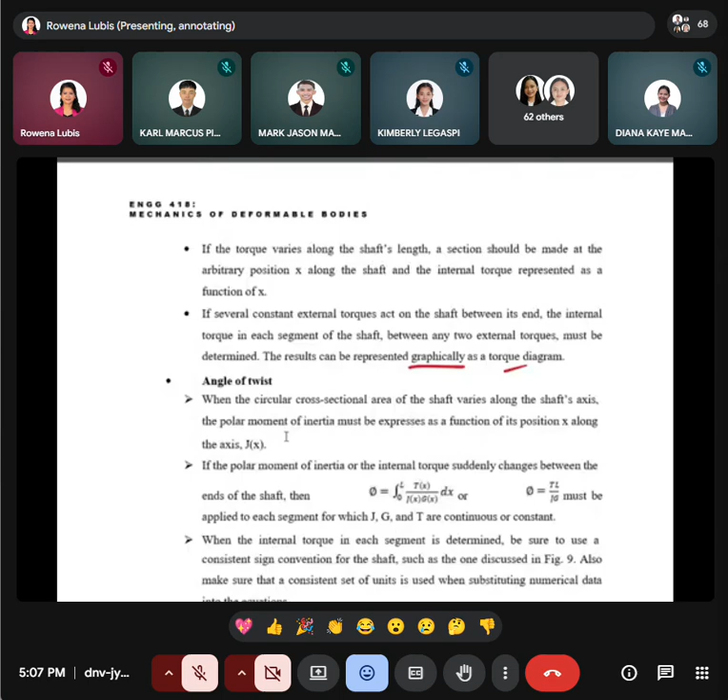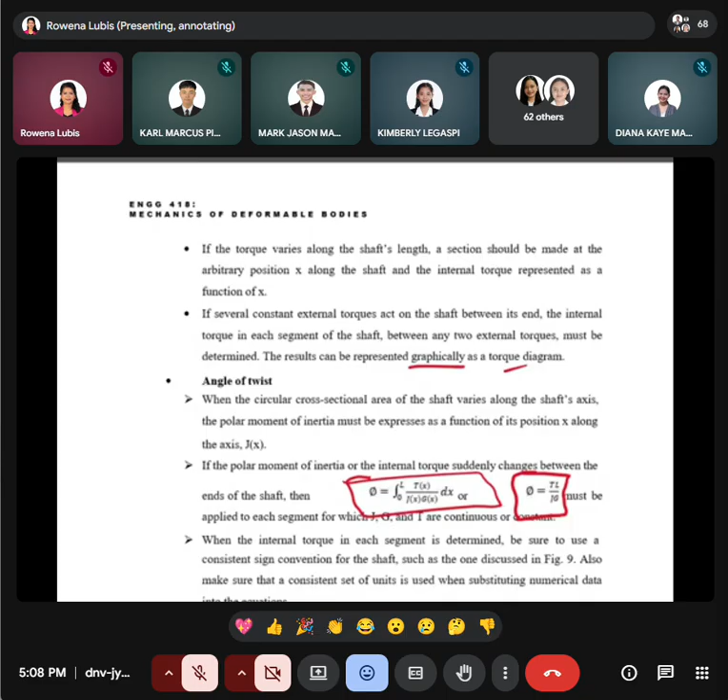And for the best result, we can represent it graphically in a torque diagram. This is what we did earlier, which can be your option if that is easier for you. And for the angle of twist, when solving for the angle of twist, if the shaft geometry varies, use J of x as a function of position. So if torque or geometry changes abruptly, apply the formula for each segment. That's our formula, this one, when our shaft axis or position x varies. Use that relation. And for a constant segment, we just have to use this formula for the angle of twist.

And the last but not least important point we have to remember is that we have to be consistent in our sign convention.

Always ensure the proper sign convention, the recommended right hand rule. Also, consistent units throughout the solution.

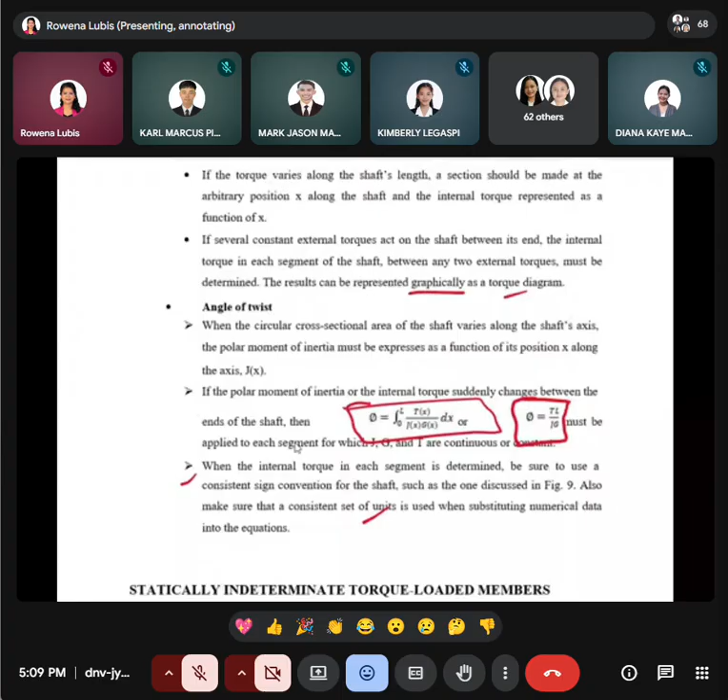Now let's move on to a more advanced case: statically indeterminate torque loaded members, or statically indeterminate shafts.

A shaft is statically indeterminate when equilibrium equations alone are not enough to solve the unknown torque values.

For example, if the shaft is fixed at both ends, the reaction torques at those supports are unknown.

From equilibrium, we have the summation of moments equal to zero.

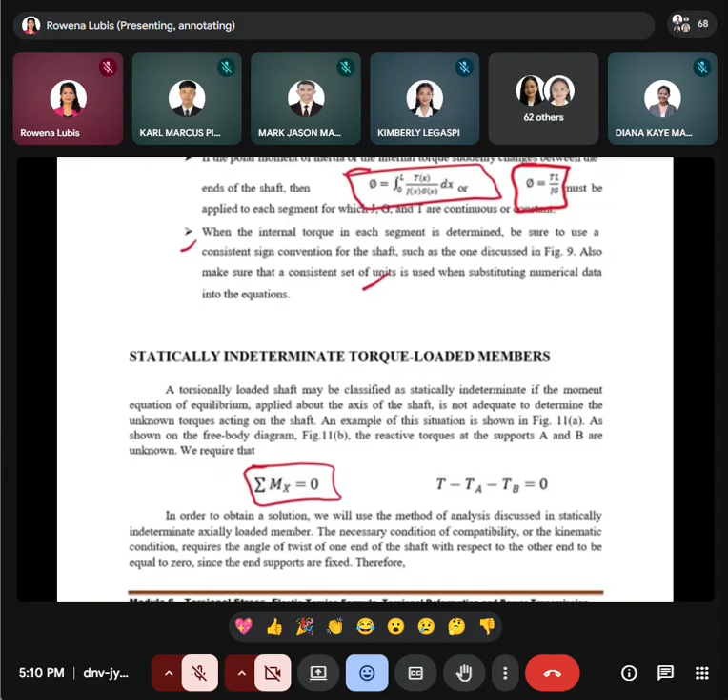Let's look at figure 11B. This is the figure we are talking about. We have here two fixed connections or supports.

We have to find the value of the torques or reactions at those fixed ends by using the equilibrium equation.

This gives us just one equation, but there are multiple unknowns.

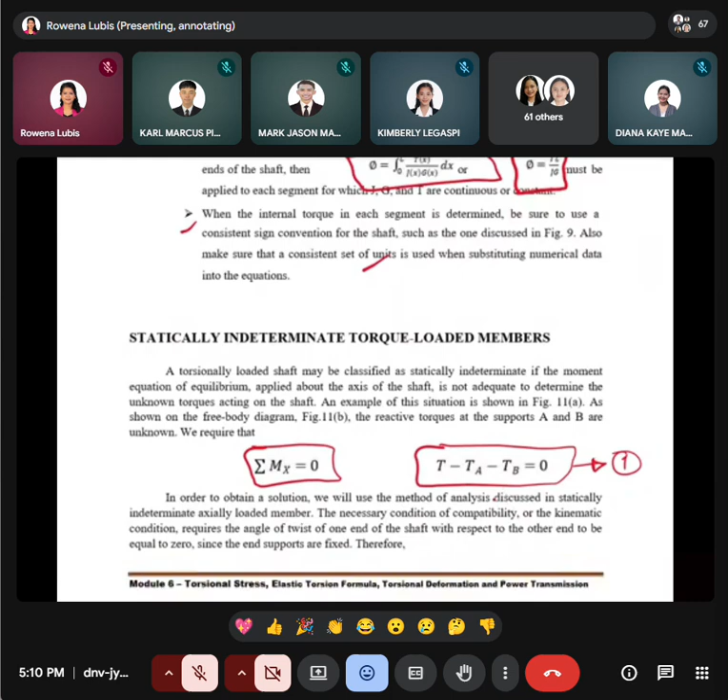That is why we call it indeterminate torque loaded members.

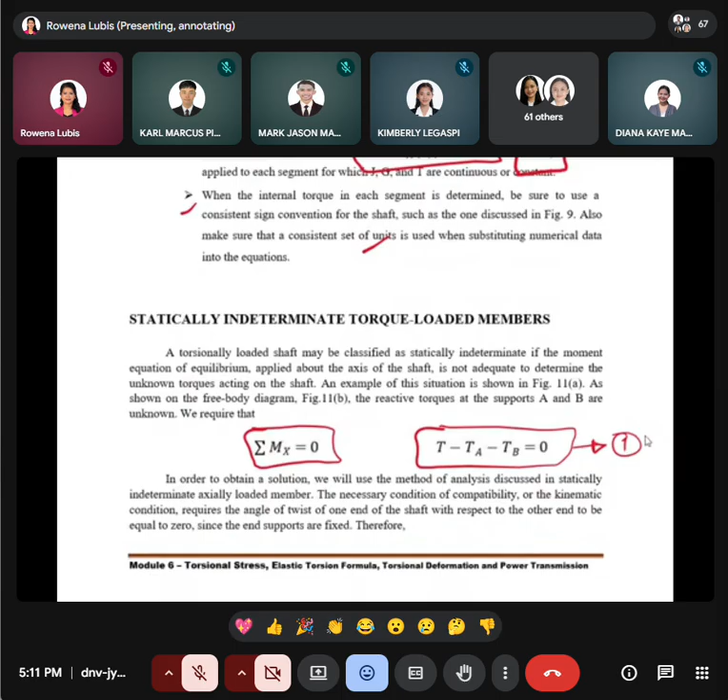If we are dealing with statically indeterminate torque loaded members, we will be dealing with the compatibility condition. To solve, we use deformation compatibility, since both ends are fixed, the total angle of twist must be equal to zero.

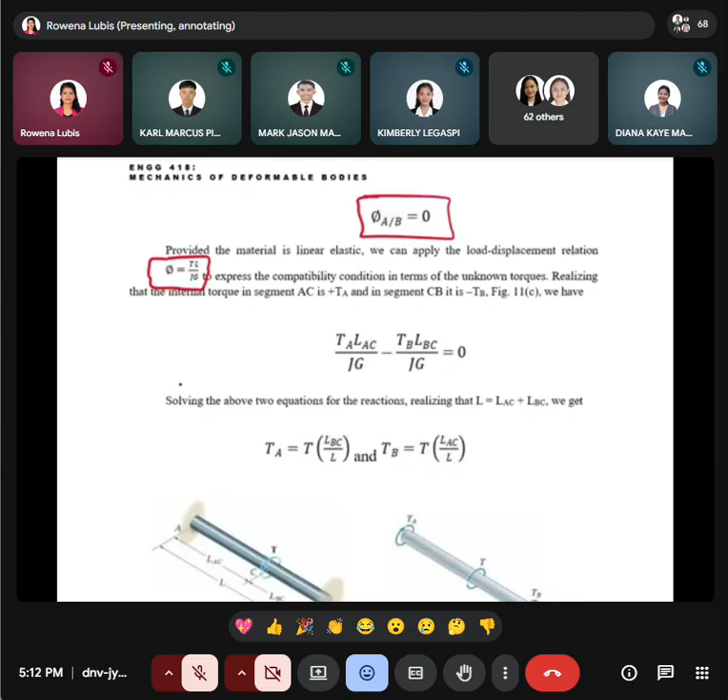And to the segment CB.

And the compatibility equation, as being presented, is this formula.

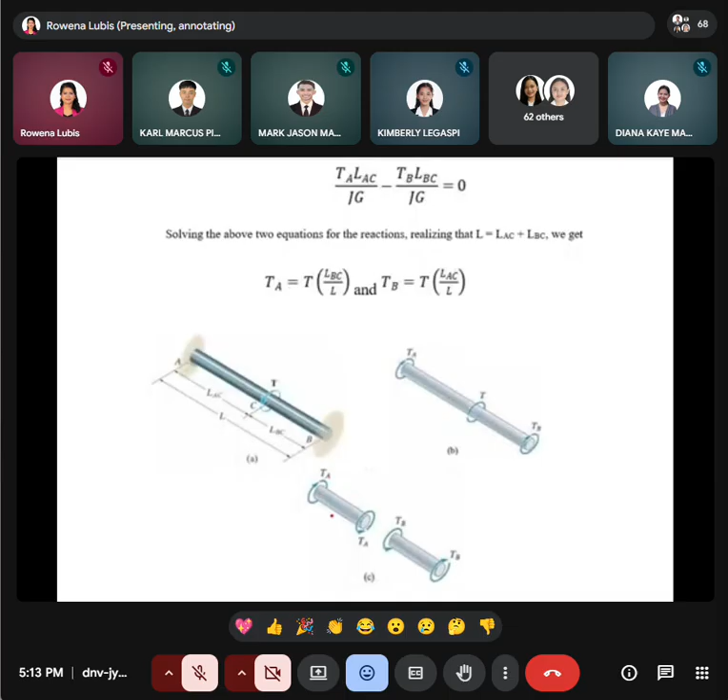The compatibility equation becomes this, coming from this illustration — this figure where we cut the shaft. So here is our compatibility equation.

Solving the above equation for the reaction, realizing that the length equals the length AC plus the length BC.

So we can get that TA is equal to T multiplied by the length BC over L, and TB, or the torque at B, is equal to T multiplied by the length AC over the entire length L.

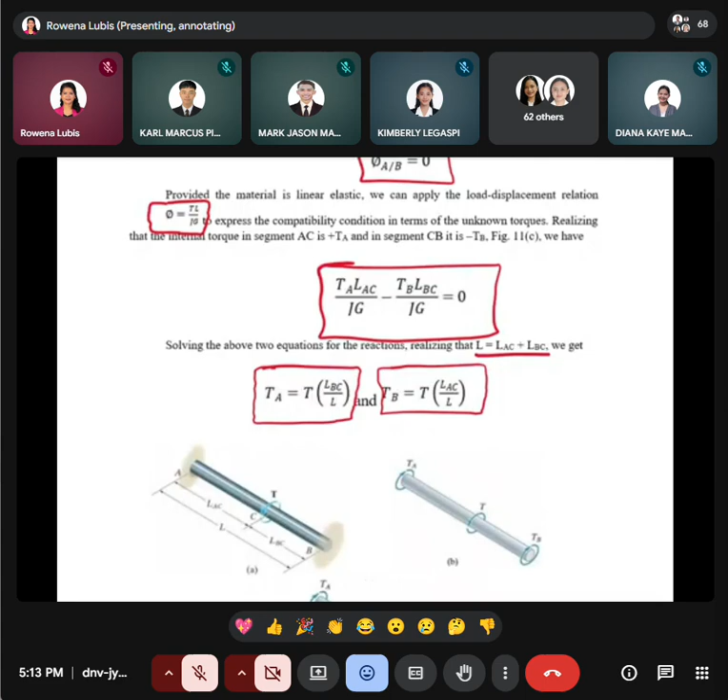So if you interpret this, torque is distributed based on segment lengths. The longer segment carries less torque, and the shorter segment carries more torque.

Just remember that for a statically indeterminate shaft, the load distribution depends not only on equilibrium but also on how much each segment resists deformation.

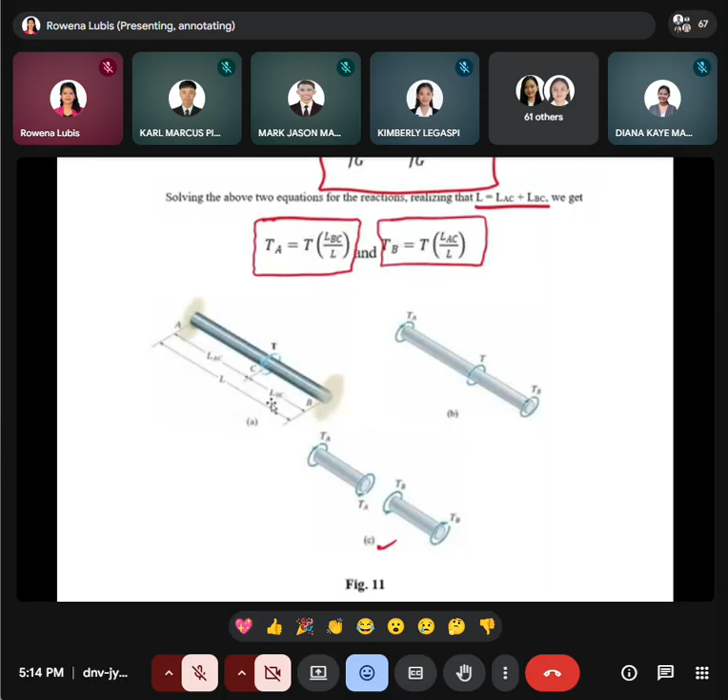So when both ends are fixed, the shaft cannot freely twist. Internal torques adjust themselves to satisfy both equilibrium and zero total deformation.

Now let's proceed to the procedure for analysis for statically indeterminate torsion. Let's summarize this step by step.

First, equilibrium. You should present your solution along with a free body diagram. Draw the FBD of the shaft, identify all applied torques and reactions, and apply the equation of moment equilibrium, summation of moments equals zero.

Next, compatibility. Write the compatibility condition, considering how the shaft is constrained. As given in our previous example, if both ends are fixed, the total angle of twist is equal to zero.

And if one end is fixed, the twist is measured relative to that point. So remember, it depends on the condition.

Next, we have load displacement relationship. Relate torque to deformation using the angle of twist equals TL over JG.

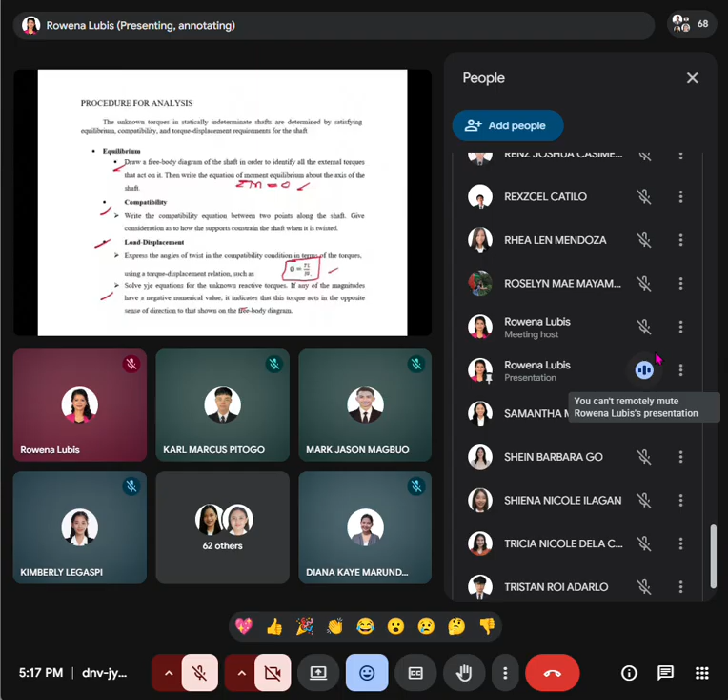And that's all for our concept discussion for the last part of our chapter 6.